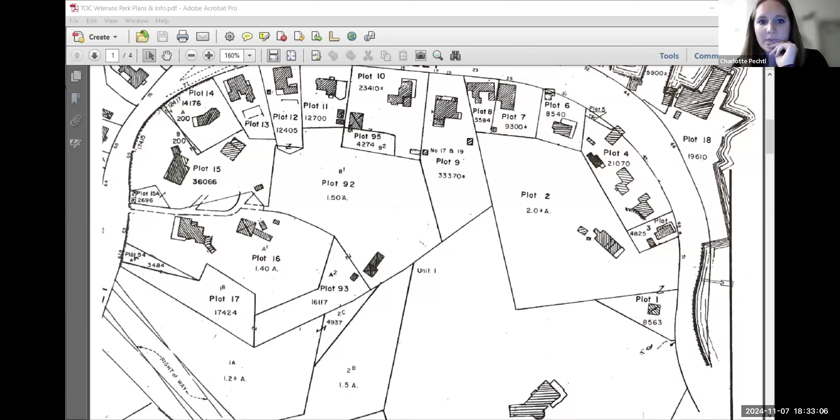Hold on one sec, I'm going to pull up the plans. You want to pull up the packet first, or the plan and the photograph probably is best. Okay, we'll do the plans first. This is just the plot of Veterans Park, right below the Elm Street condos. And then I have the proposed memorial wall up and the photos. Why don't you leave that photo up, I can talk better probably.

Good evening everyone. The Veterans Memorial Committee has been building out Veterans Park for 54 years. This wall we're proposing finishes off listing the only 2 wars we haven't listed yet, the Revolution and the War of 1812. Our proposal is we come along the top of that existing seawall, just build on top of that, no excavation, no disturbing it.

And just as you look up the walkway towards the condos, you see a little patch of grass, probably around 200 square feet. We propose to replace that grass plot with permeable bricks like they have on the walkway at the new condo walkway, so it blends better and pulls our park plus their open space together. So it's a very little additional hard surface. That'll come right over where you see that little piece of grass, and it'll blend the 2 properties together. And that's it, that's our intent.

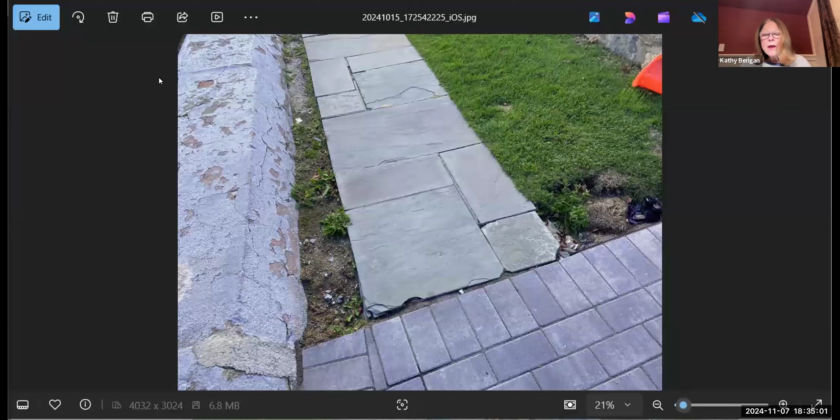Commissioners, let's start with you guys, do you have any questions or comments? I do. Glenn, where is the memorial actually going? You're building it on the seawall there? Right on top of the seawall, yes.

Okay, and it's a low 18-inch wall, like the round one that you see out there by the flagpole, probably about the same as the one behind the benches. I didn't measure it, but it's probably about 18 inches high. And it has, going back to the other picture, granite plaques where we list the names of the servicemen, and they're at a bevel at an angle like you see on the round one. Okay, great, thank you.

Anyone else? Steve, you're grumbling, are you going to talk? No, it looks pretty straightforward. I assume it's going to either replace or layer over the seawall itself.

It's built right on top of the seawall. We have some engineering drawings that the building inspector has looked at, so we know how it's going to fasten, and it's right on top.

Mr. Pratt, we haven't seen the layout of this, but is it going to be as wide as the existing walkway to the east? Well, the bluestone that's on there now will be replaced with the same brick, so we'll have the exact same surface. It'll just be the newer bricks plus the grass.

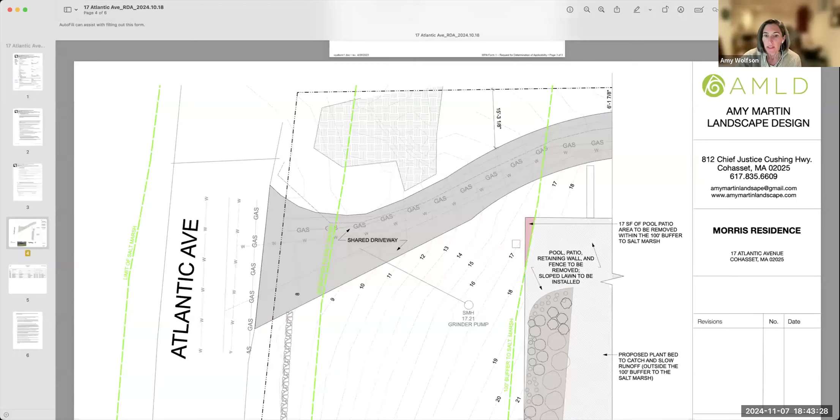17 Atlantic Avenue is across the street from a salt marsh. A portion of the property is within the 50-foot buffer and the 100-foot buffer to a salt marsh, which is over here on the left side of the screen. What we would like to do is remove the existing pool, retaining wall, and fence, which you can see in this picture. We're not going to put a new pool in. We'd like to remove the pool, the fence, and the vegetation growing on the pool and fence. 17 square feet of this area is within the 100-foot buffer to the salt marsh.

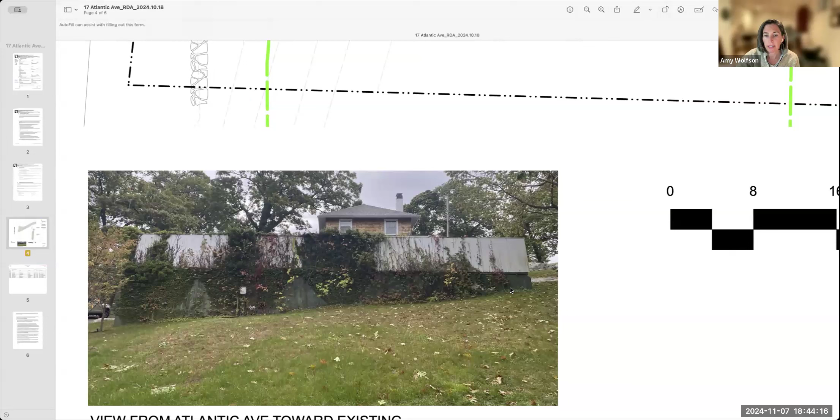What we'd like to do is remove all of this, and then this would become a sloping lawn. Outside of the 100-foot buffer, we are proposing a plant bed, which would help catch some of the runoff before it gets to the salt marsh, slow it down, and filter it before it goes down the slope across Atlantic Ave into the salt marsh. So this does seem like a net benefit to the site. We are removing impervious surface, but only a tiny bit of it is within the 100-foot buffer.

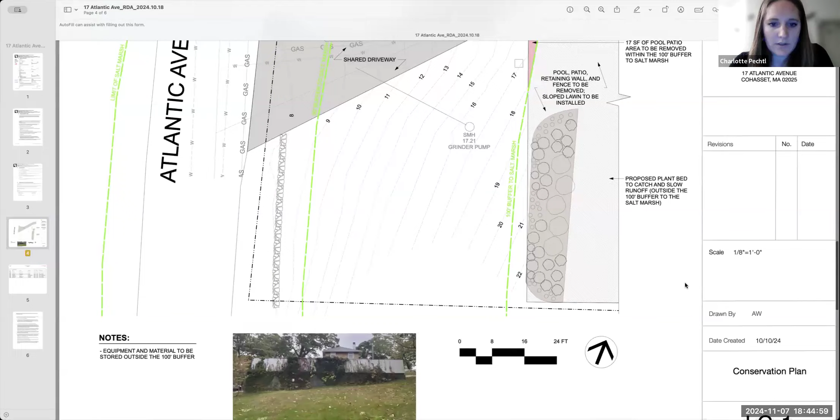Charlotte, you want to show a couple of pictures that you took on your site visit? Sure, can I take over, Amy? Go for it. Perfect.

I was waiting for them to load, so thank you. This is the existing pool in front of the home, and the majority of the pool, except for that bottom left corner, is just outside of the 100-foot buffer. It's atop an existing wall, and then the pool's in here. And then this is the sloped front yard, with the salt marsh across the street.

Okay, commissioners, you've seen it. Any comments or questions? Okay, last call.

I did have, Mr. Chair, some draft conditions for this one. I didn't know if any commissioners had questions, but I can pull them up if you like. Yes, please. Okay, just because this one involves removing a pool, I had some recommended conditions about pool water drainage. Give me one second, sorry.

There we go. So Amy, I can't remember if we talked about this, but obviously we don't want any pool water drained into the driveway, road, or catch basins in the street. Usually the standard is you drain it over existing landscaping, but since this is a sloped front yard, I don't know if the commission is open to having it drained in a way where maybe it doesn't just shoot down the hill, but can also be trickled down over existing landscaping. Either way, we do have best management practices for pools and spas, so I can include that as a condition and issue it with the determination.

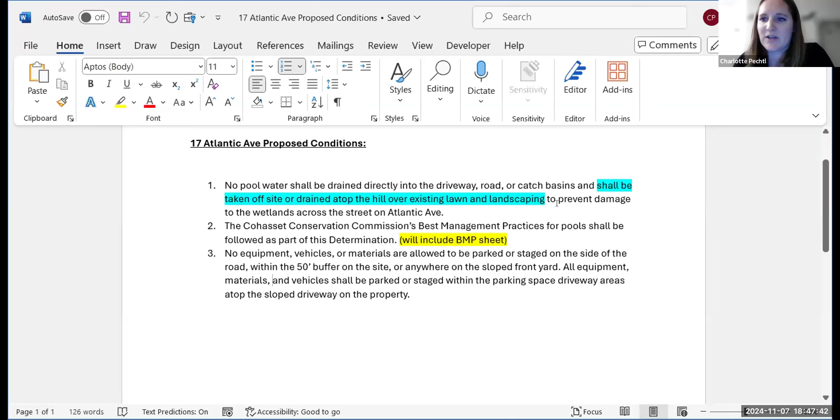We did talk about this a little bit on site, just about equipment, vehicles, and materials not being staged or parked within the 50-foot buffer or on the sloped yard, just to prevent any instances, and pretty much using the driveway parking area as much as possible, and not parking on the street or things like that. But yeah, I can take any of this language out. I just didn't know what you guys thought about the plan for draining the pool.

We actually didn't have a plan yet for draining the pool, so I'm glad you brought that up. But it does seem like a slow trickle that somehow has some kind of filtration would be helpful.

I think you're going to have to pump it uphill to achieve what you want, because we really don't want the water entering the 100-foot buffer. So you should be well above that. It is a steep slope, so if you can pump it to the top of the lot and trickle it in there, that'd be good. Otherwise, you can get a service to come pump it out into a truck and cart it off.

So one or the other. I would think it'd be best, if you're going to trickle it, that you actually take it to the highest elevation on the lot before you start pumping. Take your outlet pipe.

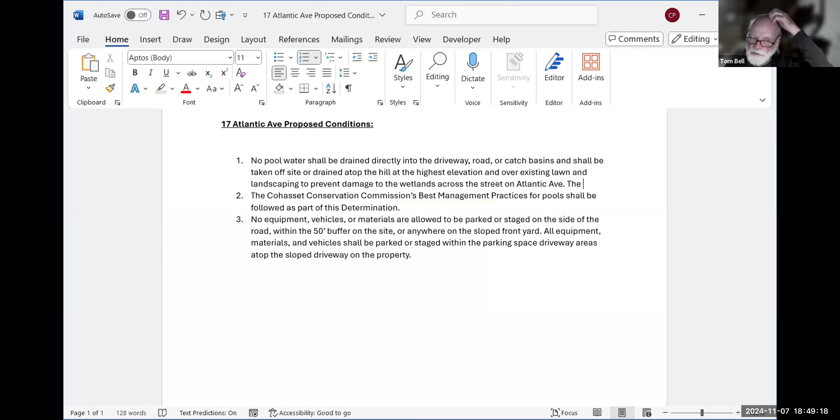I suppose we ought to think about a flow rate that is adequate for it to infiltrate, and it's hard to predict that in advance. So maybe we specify that the rate be slow enough so that there's little or no sheet flow, at least within say 10 or 20 feet of where you're discharging the water.

I didn't state that very clearly. Do you understand what I'm saying? Charlotte, how about you? Sorry, I was typing as you were saying, so the drainage rate shall not result in sheet flow within the discharge area. Does that kind of make sense? I would say you're going to have a certain amount of sheet flow in that discharge area.

The question is, how far down the hill will we allow that to be before it has to infiltrate? What we don't want is to discharge it at the top of the hill and have it end up in the street anyway. We really need to infiltrate all of that water.

Maybe before it enters the 50-foot buffer. Well, the 50-foot buffer is pretty much the street, isn't it? It's not quite - like a little bit, maybe not halfway, but a little bit less than halfway up that slope on the front yard. Because 100 feet is just at that bottom left corner of where that wall is. So the upper half of the slope is the 100-foot buffer, and the lower half to the toe of the slope and into the street is the 50-foot buffer.

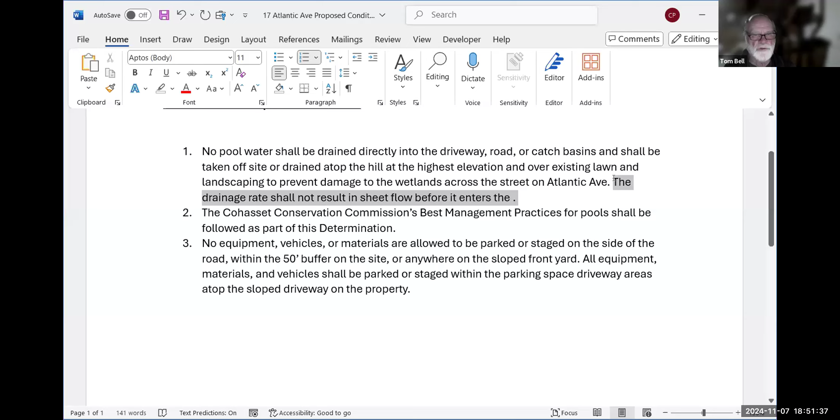So maybe we should specify that it be trucked out. It's hard to imagine somebody's going to stand there for 4 or 5 hours playing with the valves to make sure it's not flowing into the street. And if it does flow into that street, it would defeat the whole purpose of the condition in the first place. Yeah, that should be feasible.

Okay, is the pool still full or is it partially empty? I'm not sure how full it is. It's got a cover on it, so we can't tell.

I think I would prefer to see a condition that it be trucked away. If it wasn't such a steep slope and wasn't so close to the resource, it'd be one thing, but you've got a really steep hill. That ground's not going to want to accept that water - if it's like my yard, it's dry as a bone out there, so it would take a lot to even get infiltration started unless you dig a trench or something. So I don't see a practical way of discharging it on site. Now if you think there's an engineering solution for this, we could continue and you can come back with a different plan.

I think it's feasible to get it trucked off site. Don't we also have a restriction or prohibition on chlorinated water, which would probably make it more practical to truck it out? But it probably hasn't been chlorinated in quite a while - if they used it this summer, maybe, but if they haven't used it in a while, all that chlorine's probably evaporated.

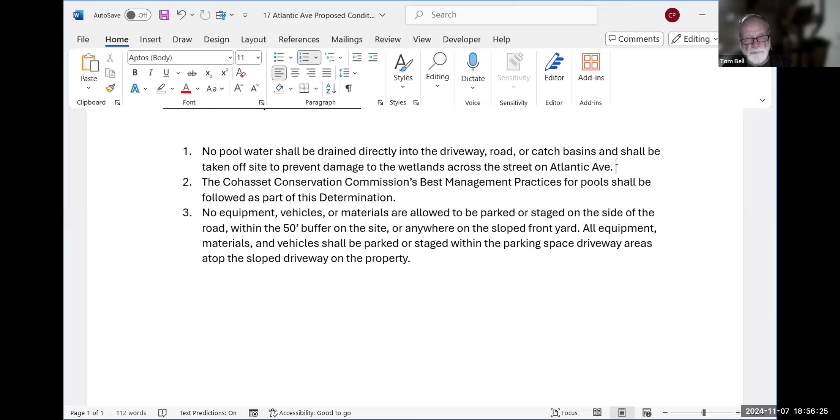Okay, so I move that we issue a -3 and -6 determination for the RDA 2418 at 17 Atlantic Avenue, with the conditions shown on screen, and the understanding that they can be modified administratively for the infiltration if it's feasible.

Do I have a second? Berrigan, second. Okay, Kathy, how do you vote? Kathy Berrigan, aye. Steve Magnell, aye. Valeria Romano. Valeria, you're muted. Unmute. Hello, can you hear me? Sorry, I was having trouble unmuting. Valeria Romano, aye. Tom Bell, aye.

That motion passes 4-0-0. Finally, we don't need a variance for this. This is in the 100, right? So we're good. So the public hearing for RDA 2418 at 17 Atlantic Avenue is now closed. Thank you, Amy.

Next is public hearing for NOI 2430, 16 Quonahassit Trail, for proposed additions. In accordance with Massachusetts General Laws, Chapter 131, Section 40, of the Cohasset Wetlands Bylaw and the Cohasset Stormwater Bylaw, the Cohasset Conservation Commission will hold a public hearing on Thursday, November 7th, 2024 at 6:30 p.m. via remote participation on a Zoom platform for NOI 2430, 16 Quonahassit Trail. Charlotte, will you introduce our applicant?

Yes, so I think, hi Xander, are you doing this? Are you presenting this one? Yeah, this one's me. We have the applicant, Matt Broderick, and Xander, could you introduce yourself for the record, please? Yes, so for the record, Xander Oram, Merrill Engineers and Land Surveyors, here representing the homeowner, Matt Broderick, for his proposed addition at 16 Quonahassit Trail.

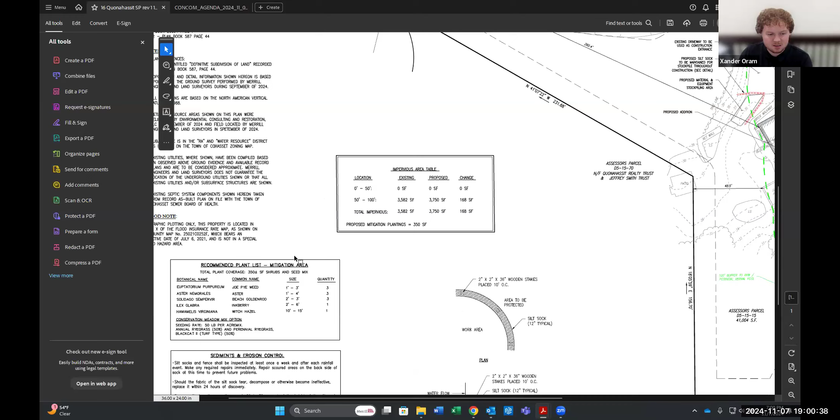We propose 2-to-1 mitigation since there are 2 resource areas here, so it's about 350 square feet of plantings. We have a planting list that's sourced—all the plants are sourced from the Cohasset Conservation Planting List. We can take a look at that if you all want to.

We have erosion control proposed around the addition, stockpile area, and around the plantings as recommended by the agent. We're requesting 2 variances, one for the plantings within the 50-foot buffer and one for theoretically being within 100 feet of a potential vernal pool. And that is it from me.

Charlotte, do you have any comments about this?

Unfortunately, I couldn't make it out to this site, but I had some recommended conditions for the project overall—mostly just looking at the mitigation planting area and figuring out the exact limits of that before any mitigation work starts. But for the most part, pretty straightforward for me. There is still a variance request that was put in place as part of the plantings that are partially in the 50s, so the applicant has submitted that for your approval.

I don't think there are any bedrooms being proposed, so you don't need any other board reviews for this? No, I don't believe so. Okay.

Yeah, I have a couple of concerns. You just told us that the potential vernal pool is coincident, the edge of it is coincident with the wetlands edge. Is that right? That's how we are describing it, yes, just being conservative. So that means you've got a 100-foot area around your vernal pool that's a no-disturb zone, according to the Cohasset wetland regulations, section 26D I believe. Correct me if I'm wrong. It says that structures within 100 feet of a vernal pool which pre-exist identification or certification may be maintained but not expanded closer to the vernal pool.

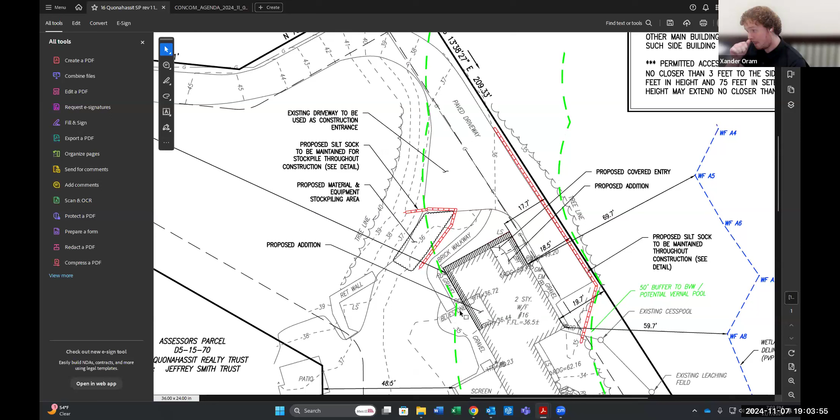My other concern is I see you've got a cesspool and an existing leaching field. Has that been tested to see if it's Title V compliant? I'm not sure the answer to that. Obviously, if you've got to put in a new sewer system here, that's going to be an issue too. Well, as far as I know, it's working. The applicant, the homeowner, currently lives there and is occupying the home. So I don't believe it's been tested, but it's functioning—he's living in the home.

Well, I'm just noting these things because this property is adjacent to two significant resources, very close to it. It's been there a long time. I understand that. And having a cesspool there still is obviously a threat to the resource. If it hasn't failed, then there's really nothing we can do about this. But I'm not sure of the protocol here.

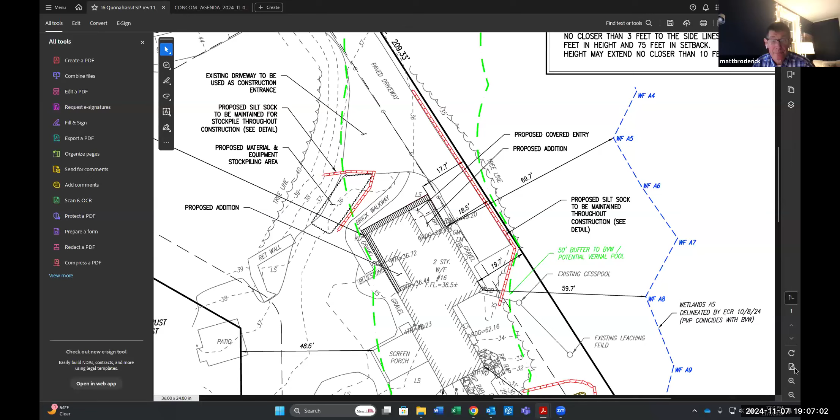Just lawn, landscape area. The area right there, Xander - oh, there's actually a bulkhead now. At this point we've got it listed as permeable, but frankly that's a big chunk of granite currently. So the only thing we're doing there is putting an access porch where that bulkhead is, leading out, and it essentially covers that same area the bulkhead is in now.

And then the other side is that rectangle to the west - that's currently gravel, just a walkway to a door. Between the existing kitchen there's a porch on the southern side, and that's basically getting turned into a rectangle from these open areas. The house itself, originally from around 1860, had its front door pointing south, which is now the railroad, so we don't have an entrance besides the one on the western side, which is just a kitchen door.

So that's the plan. I was actually asking about the area that you're going to do the plantings in, or what was in there now.

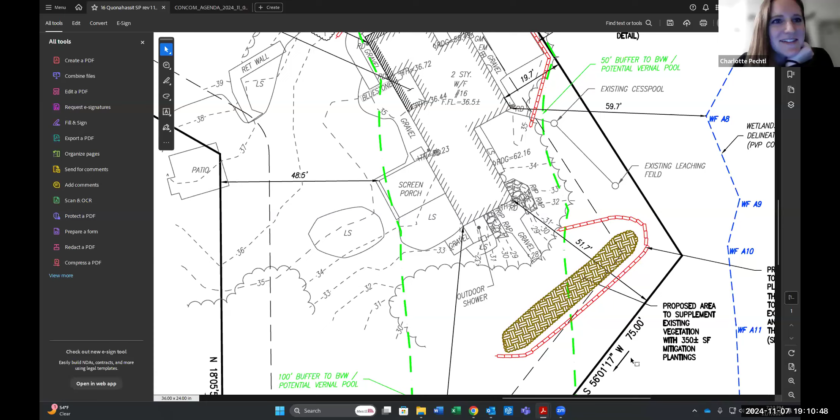Xander, can I take over here? Oh yes, 100%, there you go. Yeah, the Zoom updated, so it's like, do you want multiple people to share? I'm like, no. Yeah, it looks different now. I hate that, that's why I got confused earlier sharing the screen.

So I can take this condition out, seeing as there's no bedroom count, because that was Board of Health's concern. They just didn't know if the addition would result in an additional bedroom that may impact the working cesspool system. So I can take this out unless you want to leave it in as just a safety thing.

Is it okay, Mr. Chair, if I ask the applicant directly - do you plan to put in any bedroom space? It's really just a bump out of an existing room? Mr. Broderick, you're muted. There you go, I got it. Thank you - no, we don't plan on adding any extra bedroom space.

Okay, awesome. Yeah, just because that may or may not impact the permit, may impact the plans, and then it may or may not have to come back to us.

So that's good, so yeah, just three simple conditions then. Just so you know, I apologize, Mr. Broderick, I wasn't able to get out today. I really wanted to, but unfortunately I was held hostage in the office today.

So the exact location of the restoration area shall be located in the field by the applicant and reviewed and approved by the agent prior to planting.

Just so you know, maybe we want to shift it. We'll just make sure that it looks good before any planting work starts. And then the final list of proposed plantings shall be submitted to the agent in writing for approval prior to any planting work, just because sometimes what's on the plan, maybe we want to change it.

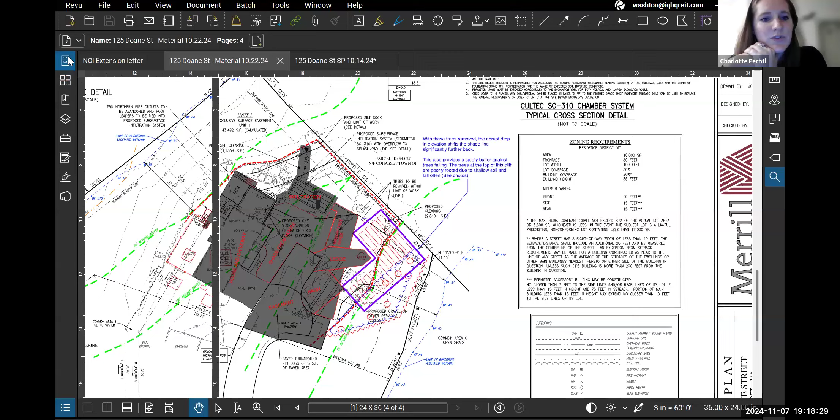Yeah, a couple things. Will, I see you've pulled up the material - I don't know if that might be helpful for your diagram that shows there seems to be limited space on the property to put this. I think you said there's a specific reason why you chose this area for the lighting. On this side, where the proposed garden bed and everything is, I can pull up photos too if helpful, but there's a pretty steep slope that drops down to where the wetland is.

Over the years, I've seen a lot of trees fall down in those areas. So the trees are sitting on very little soil, whereas the trees on the other side behind the home have more space, more soil, and seem healthier and more stable overall. Some of the trees that have to come out for this proposed project aren't on the slope, but they are in the area where a lot of trees are falling down.

Will knows our rules about if the commission wants to see replacement for that. I did propose an operation and maintenance plan for this project. There's an administrative stormwater permit that's also inclusive for the project. But I did ask Merrill and Will to draft out a construction and long-term maintenance plan. I don't think the details are in there yet, but I wanted the details for how the greenhouse and the garden area will all be maintained, so we can work together on that.

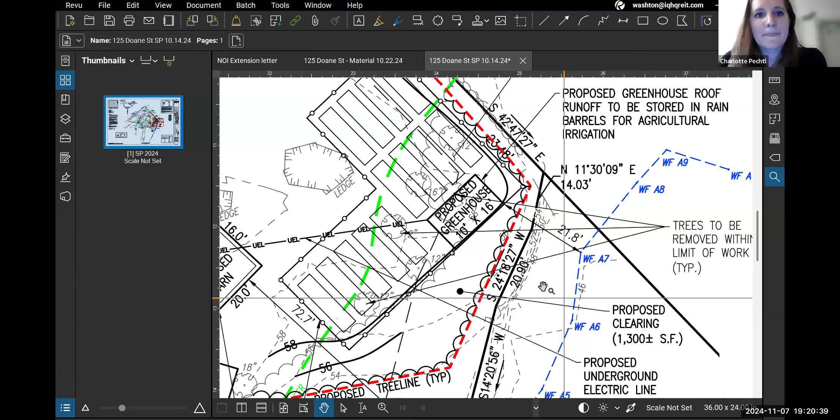Just to point out on the plan what Charlotte was talking about - you can see here all these elevation lines very close to each other is where that drop off is in the back. From there to the left on the plans is where these trees fall down all the time, because presumably they're probably all on some sort of ledge, I would think, but I don't know.

What are the species of the trees? Well, I think there's 7 that we show here to come down, and I think 4 of them are some sort of pine. There's only one large deciduous tree - I don't know if it's a beech or not. There's a lot of beech back here that are all struggling anyway. And I think one is an oak tree. Yeah, there's at least one oak. I can't remember if it's the 16-inch tree, but yeah, it's a handful of pines, one oak, and I believe one of the smaller species might be the beech.

So are you going to have to bring soil in for these, I'm assuming these are raised beds of some sort, right? Yes. So the base soil to make a level place to set them would not be imported, but the planting soil would be, yes.

And so what do you propose to bring in there? I'd assume loam, right? Yes, Victoria, my wife, has already started this year in planters with this, and she got the soil from - I'm sorry, I don't remember - it's Wild Maine something or other that's OMRI certified organic, Coast of Maine stuff. Yeah, there's a handful of varieties that use crustacean shells and seaweed. Yeah, some of the topsoil sources are kind of questionable, where that soil comes from and what might be in it. That's good that you've got something that's certified.

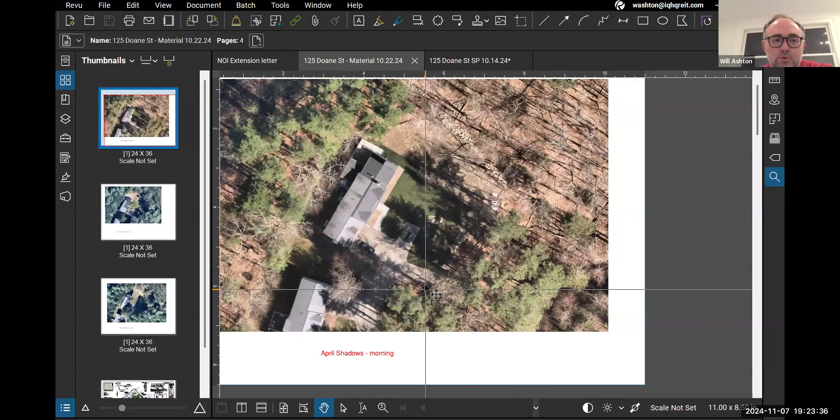So I did a Nearmap study of our yard because Victoria wanted to know where it would grow best. She has both semi shade-tolerant things and other things that require a lot of sun. So on our plan, we have the more shade-tolerant stuff in this side yard outside the buffer, but where we need more sun, I put this together to show where all the shade is, and consolidated this into a plan.

We have our infiltration here, so we can't do it there. This is shaded from the house. This is an easement we can't build on. This is shade from trees, and this is ledge. So that left us with this L shape down in the corner. This ledge back here, an 8 to 10-foot drop - if you cut the trees back, the trees behind it are that much lower, so you don't have that much shade back there.

So I noticed in your application that you brought up the term limited project. Does this fall under that rubric according to the state? Yes, because it is agricultural.

Even though there's no exemption because of prior use - so at least what little I know of the limited project statute is that it's usually brought up with regard to access to a piece of property that might cross a wetland. But in this case, you can claim a limited project for an agricultural project. Correct, yeah. So that makes you square with all of the local rules and regulations here stated.

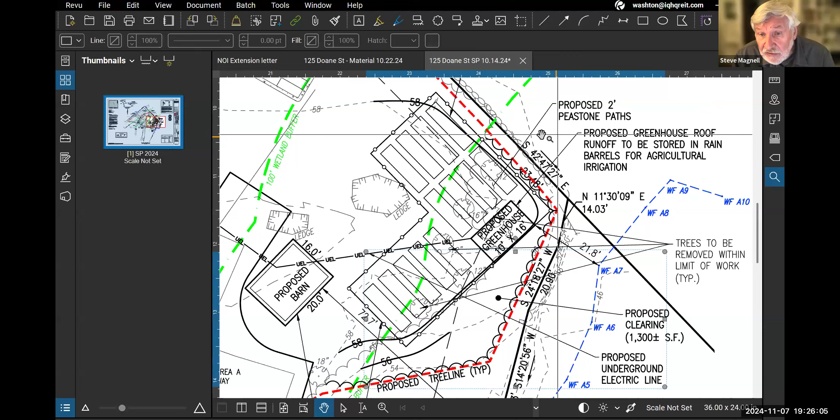One is, you show in one of your drawings a greenhouse within the planting beds. So that greenhouse is a building which will be inside of the buffer zone? That's right. It's not a traditional building like the barn or the house with a foundation - this would be set on top of the ground. There won't be any foundation in the ground. It'll only be 6 or 8 feet tall, and it's just to grow plants in the winter.

And how do the beds drain? Through the bottom, through the soil. This whole area will be soil, and the beds will be right on top of the ground, with stone paths in between. So the entire area will be permeable straight into the groundwater.

How are you going to keep the deer out? A 6 foot tall deer fence. And so that's what we're looking at there with the circles. Electric? No, I don't think we'll need to. They come walking through and eating my grass now, which if they eat the grass and not the flowers will be good.

Yeah, I wouldn't count on that. They'll go for the flowers first. Right.

The nutrients for the flowers aren't going to offend the buffer zone with drainage, right? Was that already discussed? Great question - we're going to have all OMRI certified organic fertilizers, if any at all. Victoria did some in pots this year and didn't need any specific fertilizer. Everything grew pretty well just in the soil that she had, so I don't even know that we'll need anything extra.

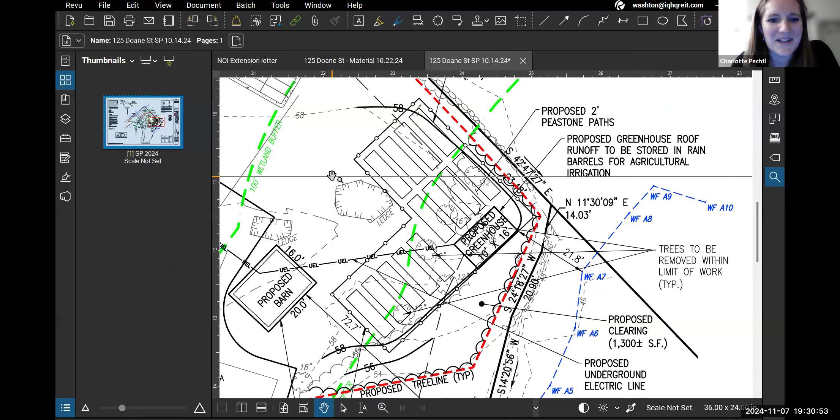So Charlotte, you have some conditions prepared? Mine were pretty simple, actually. I probably should have looked more at the limited project stuff, but I just mostly wanted to recommend... Will, is it okay if I share my screen? Yeah, yeah.

Where is it? You beat me to it. I mean, I will defer to the commission on this, but these are things we already talked about. So I think it was 6 or 7 trees coming out in the buffer zone. I think 7, let me count them. 7, yeah, that's what I remember, but I could be wrong. Oh no, 6. 6 in the 50, 1 in the 100, got it.

Okay, yep, that's where it is. So it's up to the commission if you want any tree replacement. And then, as I already mentioned, finalizing that long-term operation and maintenance plan to include maintenance details for the greenhouse and the garden bed, just to make sure we understand what's going on. And then with a long-term maintenance plan, you would just record that and use it moving forward, and you'd be falling under the different standards under the Wetlands Protection Act for that specific area, I believe.

So do you have a tree replacement plan? We don't think there's anywhere feasible on site to do it, both because the only reason we're taking them down is because of the shade, and everywhere else is taken up by infiltration or easements or whatever. Also, I think the benefit of converting lawn back to planted area, which will bring pollinators and filter rainwater and all this other stuff, could offset the 7 trees that are lost.

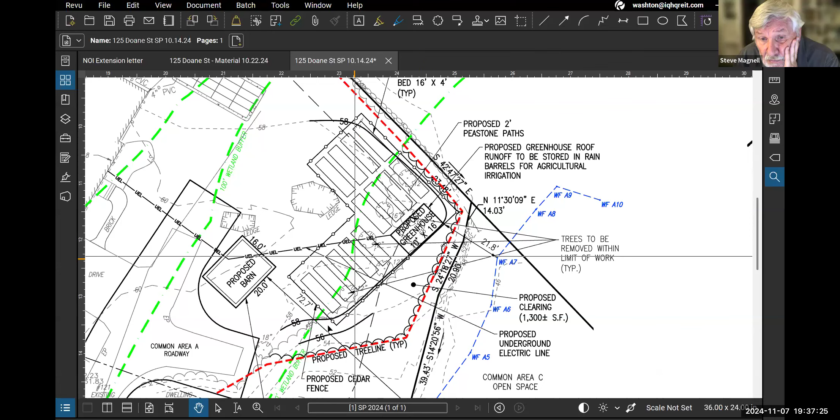So Steve's question first, since you asked first. Clearing area - you have a proposed clearing of 1,300 square feet behind the beds. That points to this whole area from the silt sock in red to the current tree line, out here in green. In the area it specifically points to, there are no trees over 12 inches, though a couple have fallen back there. There are some vines and things like that back there. And Tom, your question was?

I just wondered, you said that's a common roadway. Yeah. So there's an easement there that presumably belongs to everybody on the road, right? Yeah. Is there an opportunity to plant trees along its edge someplace between there and the south end of it? I don't know if I have it in this aerial, but it's already fairly treed. I don't know if you can, or I can pull it up on Google Maps - there are trees down that entire side. Yeah, because that's where our current drainage for the driveway goes into kind of a gully that's all treed.

I can show you on Google Maps if you want to see.

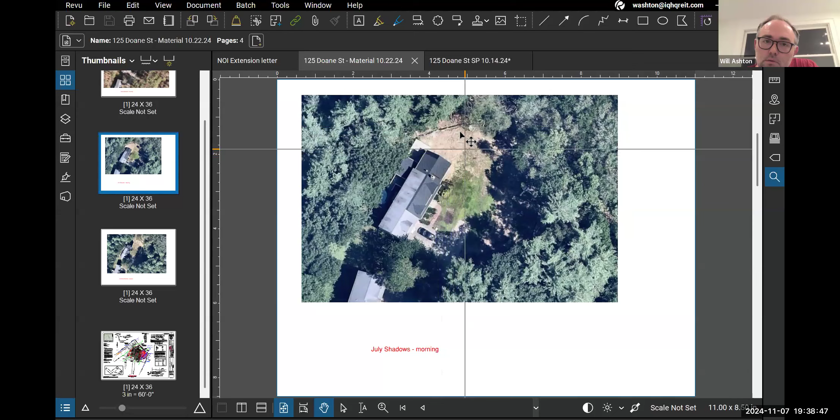What's that brown patch area, I presume that's a silt sock along the edge? Is there any room up there where you can sneak in a few trees? On the north side of your silt fence, I presume this is oriented north-south? That's the one we were required to plant from last time, it has to go right there, but we haven't planted it yet. So there's no room for a couple more there, huh? Right.

Or, like Charlotte was saying, if we wanted some sort of smaller plants there, they might fill in better than a lot of trees, you know what I mean? And that would be a good location because I don't think there's a lot of ledge under there. I think it's probably well watered and gets a little bit of sunlight, so it could work if that's of interest. It looks like it gets a fair amount of sunlight, at least for half the day.

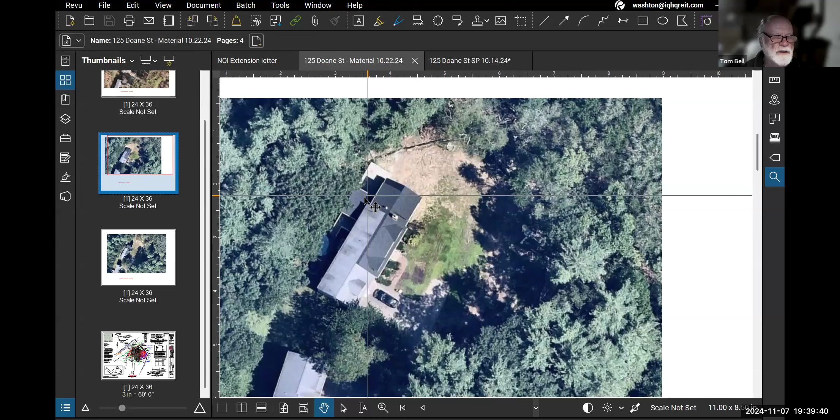Can I ask a little more about this fund? How much would that be, and is that really something that's used by us? In the time I've been here we haven't really done a lot with this fund idea. I'm gonna be honest, Valerio, this is definitely new for the town, so I don't know.

I don't really know the schedule, and also DPW has a street tree policy - they choose from a different selection of trees than ours. If he were to donate to the tree fund instead, that money would be used by the town to plant trees, but they'd probably go by the street tree policy, which is a different selection from our list, coming from a more conservative background with smaller ornamental trees. So I don't know how or when it would be used - I'd have to double check, and our DPW staff are already pretty busy.

Will, you were on the commission for quite a while - what if we let this hang out there as a condition that you and Charlotte would resolve administratively? You know what we want, right? I think Tom's right. You've been on the board longer than I have, and in my time as chair and before, I've never seen a case where we didn't replace trees within the 50. I get that you're improving the property, but we've got to do something with that, and I think Tom made that pretty clear too. So I'd let the rest of the board chime in, but do you think that would be a resolution to keep this project moving, or do we want to ask Will to come back with a planting plan, even though it doesn't seem like he has any place on this property?

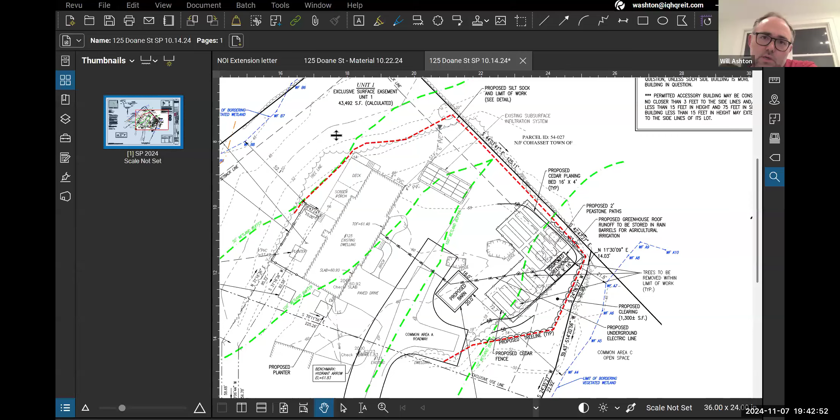Are you guys still seeing my PDF or Google Maps? Okay, we're seeing yours, looking at the plan.

Let me share this just as a thought really quickly. Sorry to delay everybody else behind me - I know how that goes.

You see Google Maps now? Okay, so here's an interesting thought I hadn't thought of before. Our property actually goes back here to the entrance. The entrance to the parking area for Wompatuck is an easement to the town on our property, so we could plant stuff back there theoretically, outside the easement but on our property.

And it is within a buffer zone? I bet it is. This floods right here all the time, the water is always at the street level right inside the entrance, so it has to be, I would think.

So that looks like a viable solution to this. Maybe you and Charlotte can go out there and have a look and see how many you can squeeze in there, and pick appropriate species that are going to work there.

That would satisfy me, and it would resolve our apparent inconsistency if we don't do this. Every project is different, I just want to say that, but I'm fully agreeing with you that we'll go plant stuff back there for sure. Hate to be put in a position where, I know.

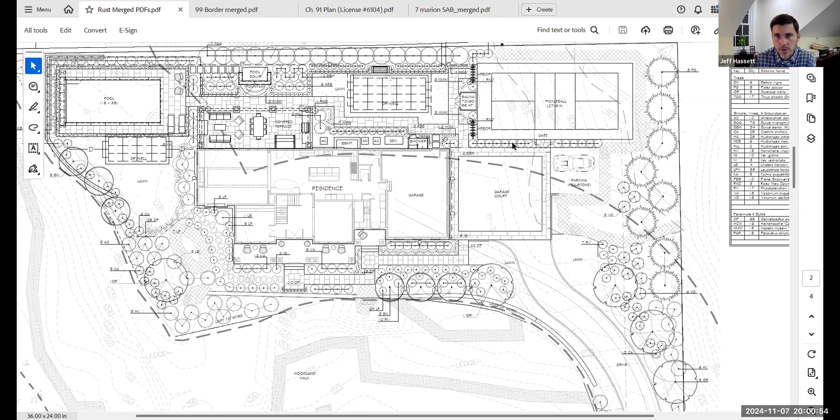Okay, so my next comment is that's not just lowering the ground a little bit. We're going from 67 down to 59 feet. They're gonna move a lot of rock here. A portion of it has already been removed. The previously plan had a driveway turnaround that went into this area, so maybe a third of it's already been removed. But yeah, there will be more.

And the hatched area around the side had contours on it before, so what's going on there? Scoot up to the drawing. I'll go to the site plan with the contours. Yeah, so it looks like some new contours around the pickleball court here. Oh, I see. That's steep grading showing the ledge cut. I was looking at that upside down, sort of, in my head, thinking how does that work. But I hadn't noticed the contour labels. Yeah, okay, I get it.

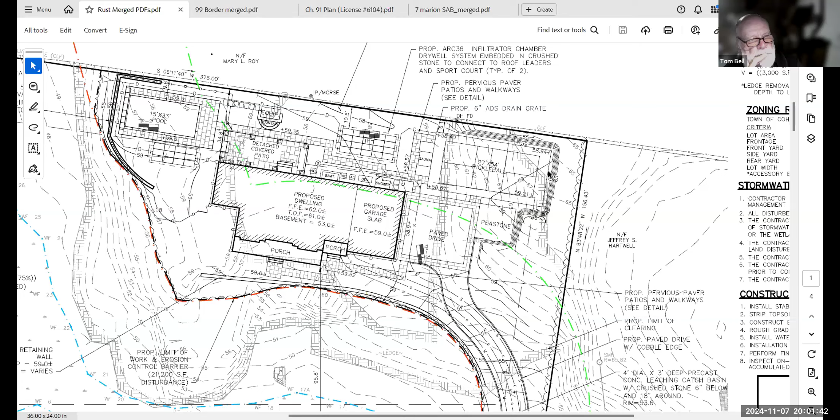Oh, beyond, Charlotte, to address your first comment about the erosion at the end of the wall, this driveway is now going to have a cobble curb on the side of it. So essentially that's going to intercept any runoff coming in this direction. So you're only going to have the runoff from this small area between the house, the driveway, and the wall. So I think once that driveway is established, there's going to be almost no watershed to that area causing the erosion.

Okay, so that area you see just above the catch basin, we were looking at it from there, and I don't know if the final grading was put in, but you can definitely see a low point there. So I'm just kind of concerned about that area where the retaining wall ends. I didn't know, based off the final design, if you would still see that, but from the existing grading towards the abutting property, it looks like it would already be pointing in that direction.

But what I was saying is right now you have all the runoff coming to that point, and there's a lot more runoff coming there now than after the driveway's put in, because the curbing intercepts the runoff and puts it into the leaching catch basin. So I think we'll be able to get that stabilized. If we have to, we'll put some stone down in that corner. I don't think it'll be an issue though, honestly. The catch basin hasn't gone in yet, the driveway hasn't gone in yet. It's just what we were looking at on the site mid-construction, so it did look like a vulnerable point with runoff. We could get some riprap in there now too, in the short term.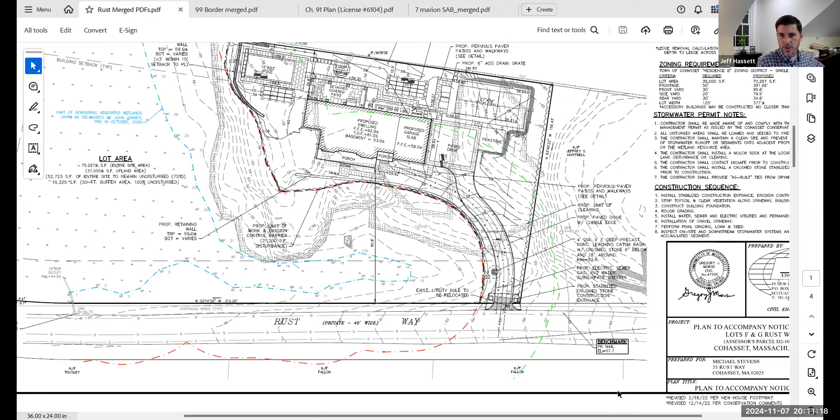So it does say proposed stabilized crushed stone construction entrance there, but it certainly doesn't show a 30-foot long zone of crushed stone. No, I'm just generally pointing to that area. So you are going to put something considerably larger than that striped area that's shown, okay.

Yeah, Rob, can you make sure of that? Yes, definitely. Rob and I talked about that on site—before they start a lot of this work, we should re-establish the stabilized construction entrance and take a look at the erosion controls around the site, since it's obviously been a while since the original ones were put in. So we definitely wanted to walk the site.

I think maybe expectedly more in the spring, right? And then just make sure that's all in place before they start taking care of the hardscaping and landscaping. Absolutely. Charlotte, do you know whether John has examined Rust Way for the condition of the pavement—

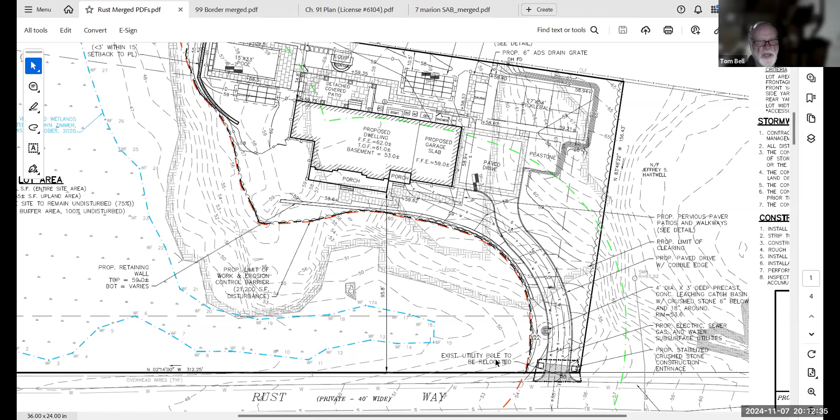I know in the past he's seen projects here where you move a lot of heavy equipment on it and required that the applicant repair the road. I can think of one specific example, but do you know whether he's looked at this? I do not, but if that's feasible for the project, I'm happy to put that in as a condition to just work with the building inspector and ensure if there are any road repairs that are needed, they're taken care of while the permit's active, I guess. Yeah, please. Would that be, Jeff, does that sound acceptable?

Rob? Yeah, okay, I can type that right now. I'll try my best to do that right now.

We'd be using Johnson Brothers if we go the blasting route, and I think they're very well known in town, very reputable. Yeah, those are the guys that tore up our street.

Was it them or the company that moved their equipment? Well, actually, it was the company that moved the equipment in and out. But I know from firsthand experience that our private ways, of course, doesn't cost the town anything, but it certainly wreaks havoc on our private ways. And so

I think we need greater protection for those, at least. I agree. Yeah, I live on a private way also in Cohasset, so I understand. I actually live right around the corner from the project on Stoneley Lane. Yeah, you wouldn't want to see Stoneley Lane with new ruts and potholes and cracks. Oh, we already have that. I wish that had been looked after on Howe Road. It perfectly ruined half of it.

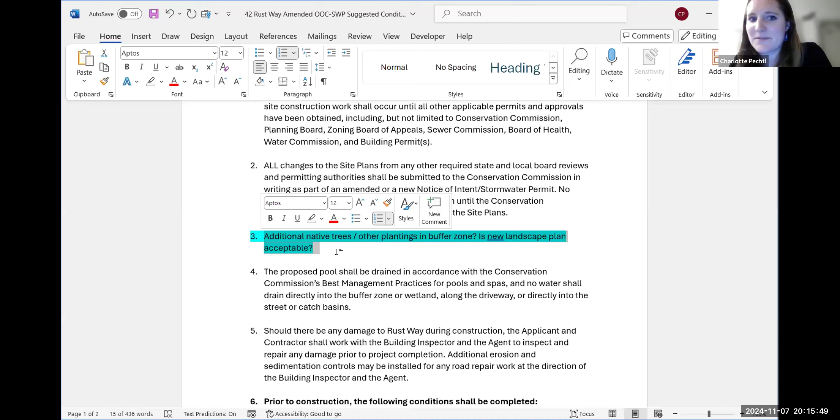And then the proposed pool shall be drained in accordance with the best management practices from the Conservation Commission for pools and spas. No water shall be drained directly into the buffer zone or wetland along the driveway or directly into the street or catch basins.

And then should there be any damage to Rust Way during construction, the applicant and contractor shall work with the building inspector and agent to inspect and repair any damage prior to project completion. Additional erosion and sedimentation controls may be installed for any road repair work at the direction of the building inspector and agent. I'm mostly probably, I assume, building inspector, but obviously since it's right in front of a wetland, I just want to make sure if they are working in the road, I'd want to see a barrier up there in front of the wetland.

And then prior to construction, the following conditions shall be completed. Well, we don't need, I mean, what do you guys think? It doesn't sound like, I mean, Jeff's pretty confident that it doesn't sound like we need anything below the retaining wall. But I don't know if we want to just keep it in here as a template, just with the note that obviously we don't want encroachment in the 50-foot buffer if we can help it, because that was the original intent of this project.

How many more feet of wall are we talking about here? Ten? Oh, you mean from the edge of the wall down to the end of the driveway? Yeah, not to the end of the driveway, but just to ensure that the wall extends at least a bit closer to that drain. Well, I don't know if we'd want to extend the wall unless you guys want to see that, but we were thinking more of like stone riprap if we had to stabilize that curve, but we may or may not need it.

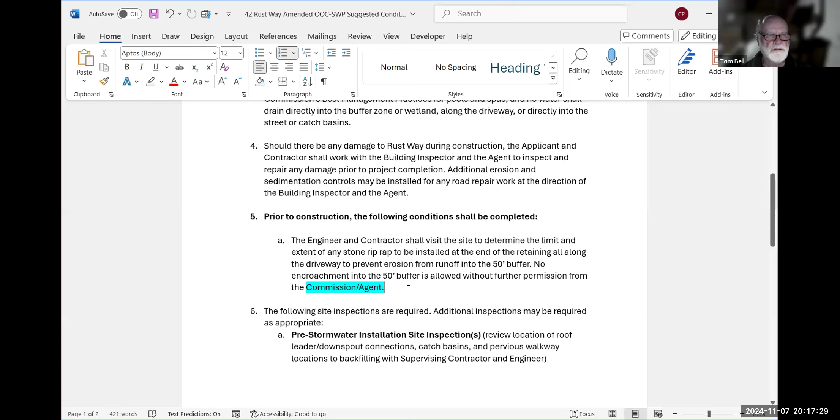And then site inspections, pretty standard. I didn't include pre-construction, obviously, since the project's already ongoing, but I did stormwater, pre and post grading, landscaping, and final site inspection. These are very standard conditions that we put in now, just so that everyone's aware. There's a lot of hands that change over when you get to the hardscaping and landscaping side of things, so just want to make sure that we're checking the site out, looking at erosion controls. So, yeah.

Okay, last chance, commissioners, to add any conditions or modify the ones we have on screen.

Okay, let's see, where are we here? I've lost my way on my... Rust. Here we go. All right, just need to get to the top of my script.

So I move to issue an amended order of conditions for NOI 2114 for 42 Rust Way for construction of a sports court, pool, driveway, and wall changes, and let's throw the stormwater permit in there as well. The amended stormwater permit 21-15 for 42 Rust Way, with the conditions shown on screen and entered into our meeting minutes.

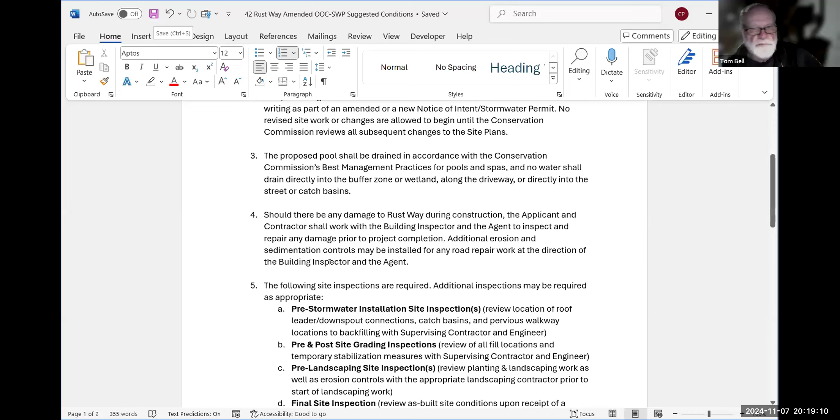Do I have a second? Berrigan, second. Kathy Berrigan, aye. Steve Magnell, aye. Valerio Romano, aye. Tom Bell, aye. That motion passes 4-0-0.

There's going to be work out. There's no work in the 50, right? No. So no variance needed.

Okay, it looks like we're wrapping up then. So the public hearing for NOI 2114 and stormwater permit 2115 at 42 Rust Way is now closed.

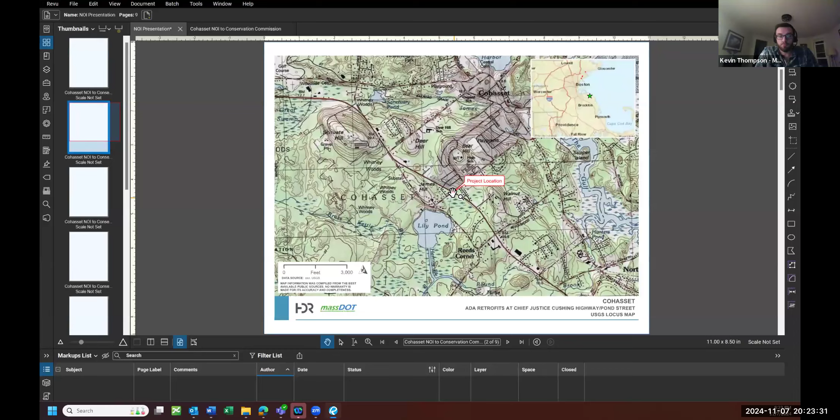The purpose of the project is to facilitate improvements of street-to-sidewalk access ramps, necessary to serve individuals with disabilities and to enhance safety. With that, I'll turn it over to Mike to present the full project for us. Thank you. Mr. Turgeon, you're muted.

There we go. So the project is at the intersection of Pond Street and 3A. We're pretty close to the schools over here and Lily Pond over here. Lily Pond is a public surface water supply. There is an intermittent stream that runs north of the project along 3A through under the intersection and then into Lily Pond. So the wetlands in the vicinity are outstanding resource waters. There are two other smaller intermittent streams that aren't shown, but we'll talk about those when we get to the plans.

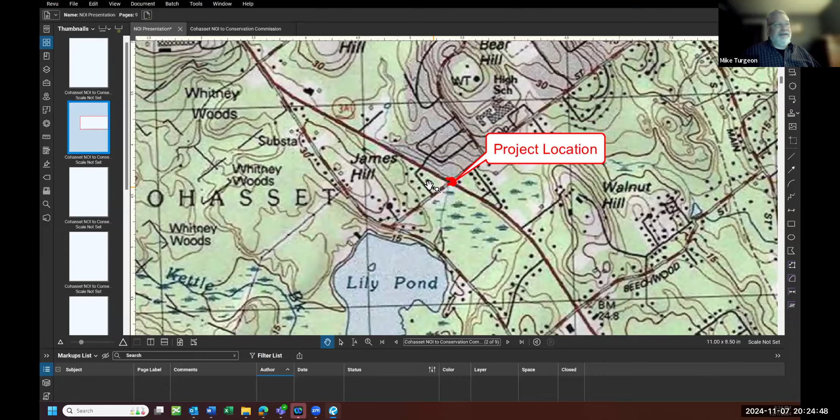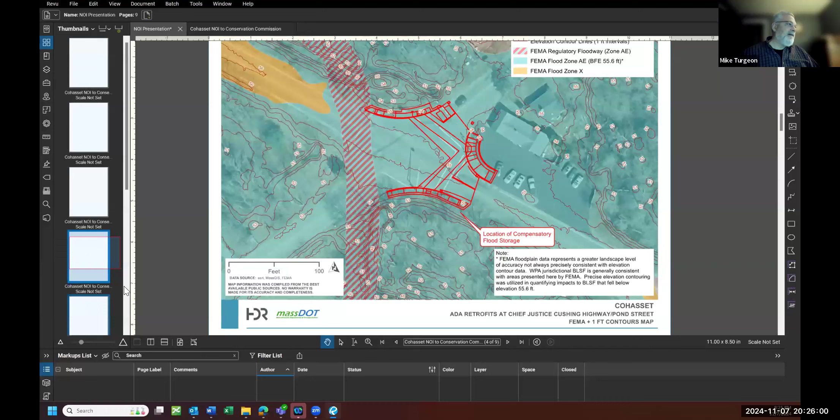And this is the southern corner of the intersection. There's an existing paved sidewalk here with no ADA ramps here or here. This is the eastern corner, eastern quadrant of the intersection, where you have no wetlands in the immediate vicinity, but there's kind of an island here with no ADA ramps associated with it. So it really makes it very difficult for someone trying to get around the corner.

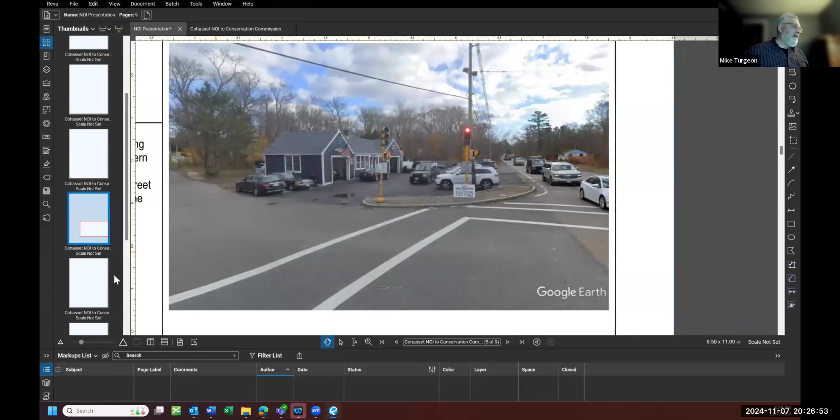And this is the northern quadrant. This area is not paved currently, but it has been altered significantly enough to not provide BLSF habitat. And it's on the northern quadrant.

So here's our impact plan. This is the stream flows along 3A. And there's a culvert here. There's a 12-inch RCP here that picks up water from the road, and there's a channel here that connects. There's a confluence here of these two streams, and they're piped under the road to the southern quadrant over here, and it heads off to the south.

There's another stream across Pond Street. There's no work going on in this quadrant, but there is a culvert here with an intermittent stream that drains to wetlands down here.

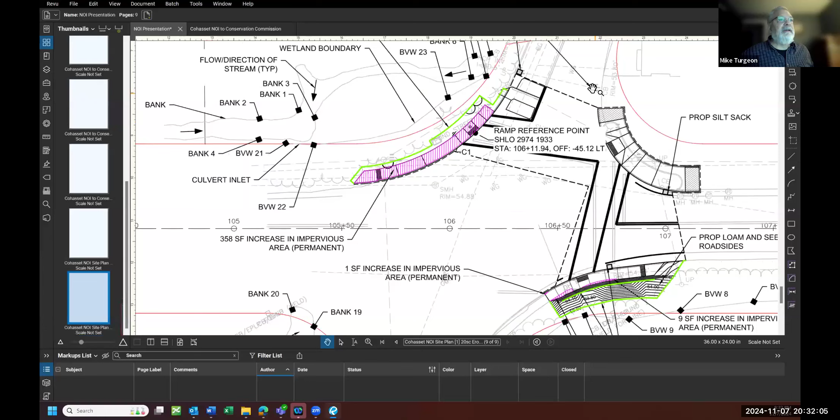And so I'll go to the next page. And here we're showing the compost tubes are in green. For erosion control, they're shown here as well. We have silt sacks proposed at all catch basins. Here, here, here, here.

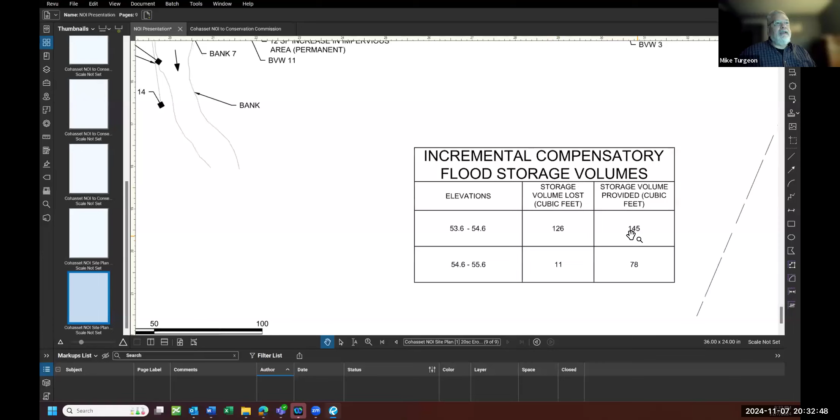And here's the proposed compensatory storage area. These are 1/10 foot contours. And so for the elevations between 53.6 and 54.6, we have 126 cubic feet lost for the construction of the sidewalks, and 145 cubic feet provided for between those elevations in the compensatory storage area. And then for between 54.6 and 55.6, we have 11 lost and 78 provided. So you end up with an increase in flood storage.

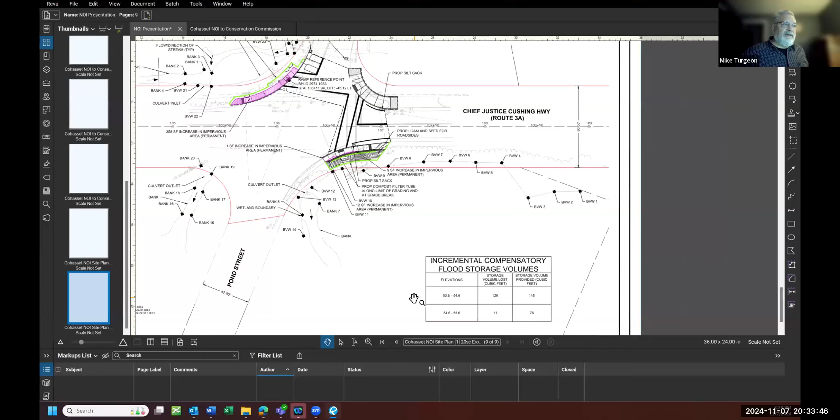And then so the only impacts to floodplain where there is currently habitat, it's for the construction of the compensatory storage area. They're below the 5,000 square foot threshold for impacts to floodplain habitat, and they provide more storage than required in the performance standards. And though we meet all the performance standards, we are also falling under a limited project at 10.53(3)(f), roadway maintenance and improvements for less than half a lane.

That's it for the presentation. Do you have any questions?

Charlotte, do you have any comments?

So, this falls under a limited project under the Wetlands Protection Act, but also in general, the MassDOT projects are exempt from our local bylaws. So we're just dealing with the Wetlands Protection Act for bordering land subject to flooding, wetland buffer zones, and limited project standards. I previously clarified with Matt, Mike, and Kevin that they're not upgrading any of the existing stormwater management systems here, the catch basins and everything, because it was determined that the existing systems can handle the increase in impervious surface, even though there is a slight increase in the 2-year and 100-year storm event runoff rates, the existing systems can handle it.

I did propose a draft set of conditions that are very similar to the conditions you've already seen for the other two MassDOT projects. Sorry, I know I sent that to you guys last minute. I don't know if you had time to look through them, but a lot of them are pretty straightforward. So at any point tonight I can review those. But those are really my comments that I had already clarified with their team.

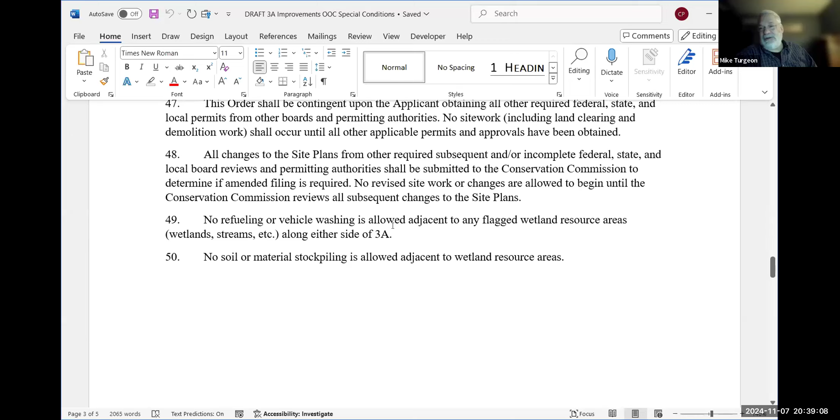I think we had some concerns about the condition where you ask us to restrict work to low flow periods, and we're not really doing that. So if we could amend things to be more applicable, maybe a stream crossing or work actually in the wetland, that would help. Agreed, yeah, I think it was number 39. 39, okay, so I can take that. It was referenced in a couple places, but I think generally, if you can.

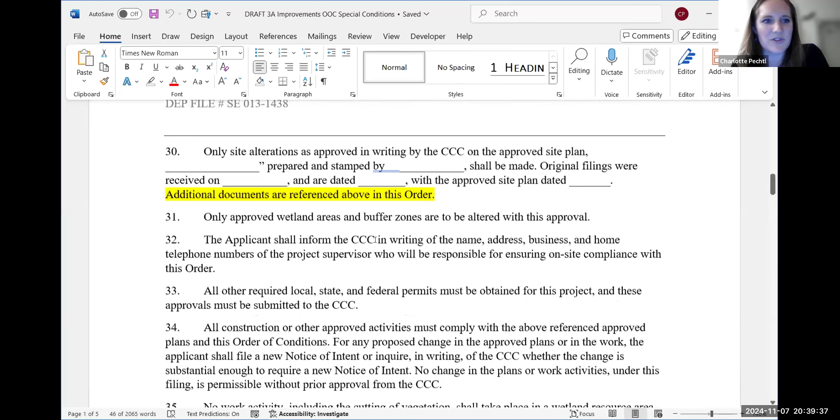So, yeah, just to quickly reference for the commissioners, this may look familiar to you. This is our template. We had previously revised it to remove... We can't see it, Charlotte.

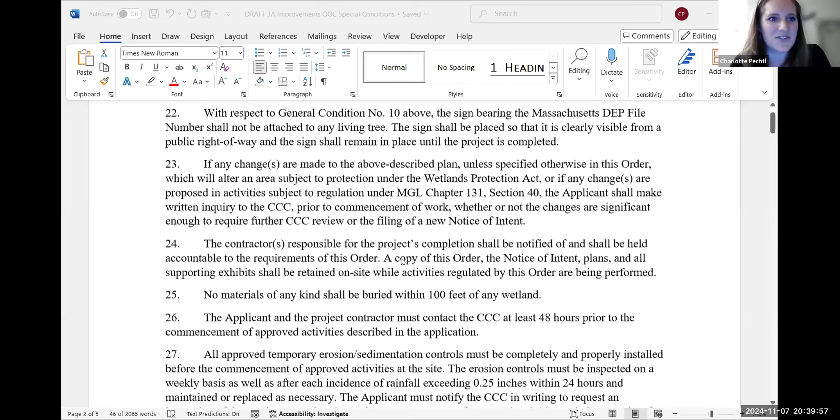So as commissioners, you guys know this is our template. We had previously modified it with the first MassDOT project we looked at to remove references to the bylaw, so this is pretty much copied from that. Condition 39 is a standard condition in our template. Since it's not pertinent to this project, they're not working in any wetland resource areas, do you guys think it's okay to take this out? Yeah, let's remove that. Okay, I'll change the numbering then, so you can ignore the numbering for now.

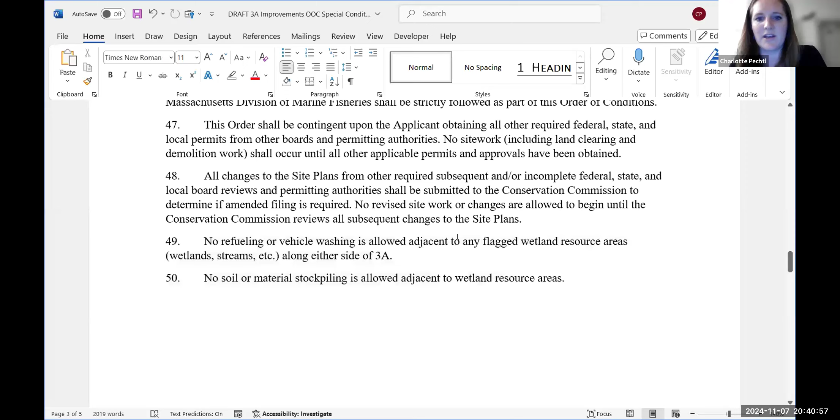So these are all our template question language. We don't read these for orders of conditions because we usually have this inclusive with our proposed conditions. So I'm going to start at 47 onward. You guys have seen these before, that the permit's contingent upon all other state, federal, local permits, and any changes have to come back to us before those changes are done. A lot of the conditions we discussed with other projects were about vehicle washing and not refueling in any areas adjacent to flagged wetlands along 3A, and no soil stockpiling near those sensitive areas. And then prior to site work, including land clearing and demolition, which again isn't really applicable here, but I can just say prior to site work, the following shall be completed.

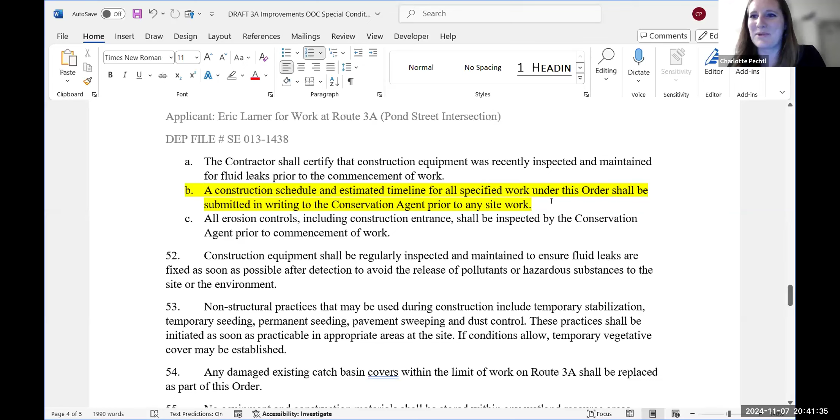These highlighted conditions, I really don't think are needed. I just had a question for the MassDOT side. I don't think you have to deal with any easements since you're working within the MassDOT right of way, so I'm pretty sure I can take this one out. And then I don't think we really need a construction schedule for this project, it's a very small limit of work, so if the commission agrees, I can take this out. But like I said, this was put in place for the larger projects on 3A.

So pretty much just before construction, certifying all equipment was inspected, maintained, no fluid leaks, and then the erosion barriers inspected by me prior to work. That's really standard for all of our projects. Construction equipment regularly inspected to ensure no fluid leaks. A lot of this is a little bit repetitive, and then just using any temporary erosion control practices as needed. This was within the other MassDOT projects. I don't know if you guys agree with that or if that's within the project budget for this particular work.

I know you guys weren't doing any improvements to the stormwater, but I don't know if it's worth keeping a note on if any catch basin covers get damaged, would we want to see those replaced? We do include quantities where we're resurfacing certain areas, particularly crosswalks here. We include items to R&R the structure, just in case it needs to be adjusted even slightly, and as part of that we usually have a small quantity of replacement covers in case, like you're saying, they are damaged. So I think that would be fine to leave in because we do consider that as part of our project.

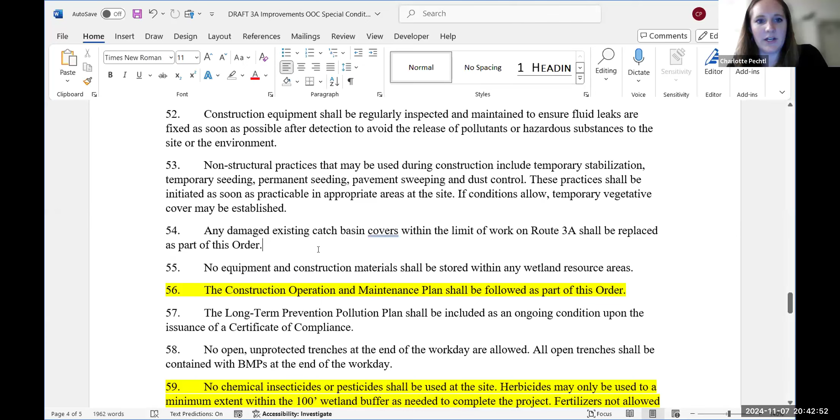Okay great, and then again a lot of this is very repetitive, but common sense about not storing anything close to a wetland. I don't know necessarily if we need a construction O&M here, just because I think it's pretty basic, unless you guys want one, but they do have a long-term prevention and pollution plan that was included in the NOI and the stormwater report and checklist. So I don't know if the commission feels strongly about wanting to see an O&M plan and having that be followed as part of the order for this particular project. Do you think you need one? I mean, you're going to be the one doing the inspections and stuff, so in a way this set of conditions kind of is one. Yeah, okay, I guess I can take it out.

They did provide... I don't think you guys had an O&M plan for construction, but you did have a long-term prevention and pollution plan in your stormwater materials, so that's kind of why I highlighted it. And then same thing with open trenches, we just want to make sure that open trenches are contained with BMPs at the end of the day. Like I said, I don't really know how much you guys have to be doing that.

And then I'll defer to the commission on this one. I don't think for this project they're going to be using these types of chemicals, but we had put this in for the other two MassDOT projects. So do you guys want this to stay or not stay?

No, let's keep that. Okay. I don't think we need this one unless you guys feel strongly that they have to, like I said, it's an intersection. It's not a whole section on 3A where they're going to be working in wetlands. So I'm okay taking it out if the commission's okay with that.

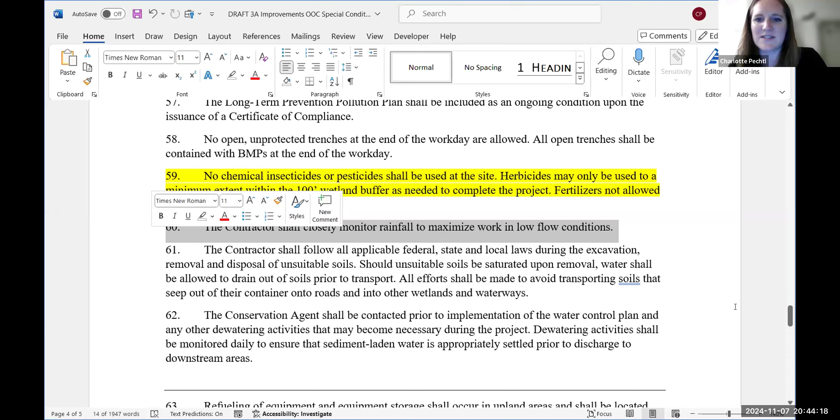Sure. Okay. And then following laws in terms of disposal, removal of unsuitable soils, pretty common sense here. And then I don't think we really have to dewater here. Do you guys anticipate any dewatering in this area? I really don't think so.

So I'm okay with taking this out if the commission's okay with that. Yeah, like I wanted to keep everything first, then take it out versus not having them. And then same thing with refueling, not being near a wetland outside the buffer zone to the maximum extent. We had talked with the other MassDOT projects that may or may not be feasible. So just as far away as possible. And then spill containment, long-term pollution prevention plan.

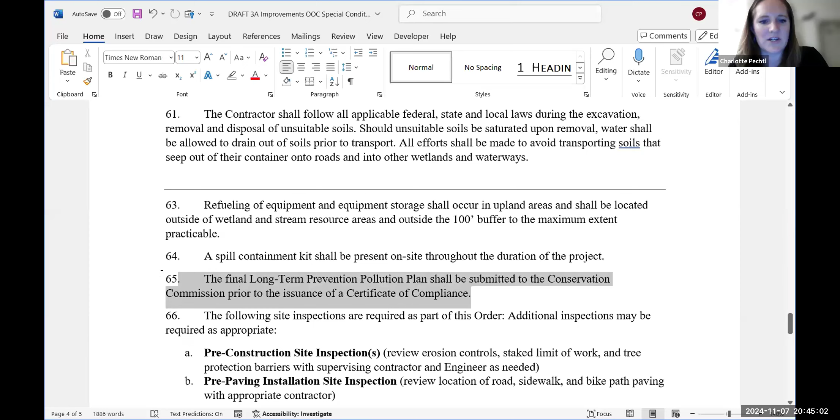Oh sorry, I think we already have that, so I don't think we need that. They already gave it to us. And then the site inspections for pre-construction, pre-paving and final, and then any additional inspections may be needed throughout the project if things come up. So like I said, all these conditions were taken from the other two MassDOT projects we'd already previously reviewed and approved. So pretty much just thinned out the set of conditions that we already had.

Doesn't sound like you guys had any issues with those either. No, no, okay, that's fine, Charlotte. All right.

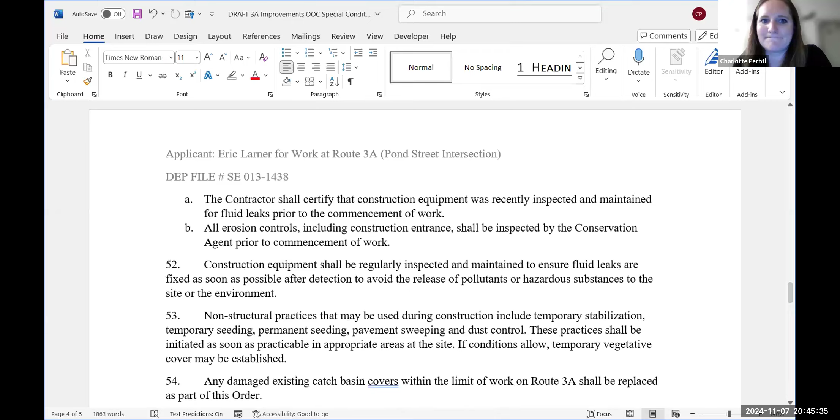All right, so I move that we issue an order of conditions for NOI 2431 at Pond Street and 3A for the work of constructing ADA compliant structures. Do I have a second? Berrigan, second. Okay, Kathy Berrigan, aye.

Steve Magnell, aye. Valerio Romano. Valerio still with us? Valerio, you're muted. Valerio, if you can hear us, you're muted. You want to have him abstain, Mr. Chair? Yeah. Tom Bell, aye. So this motion passes 3-0-1.

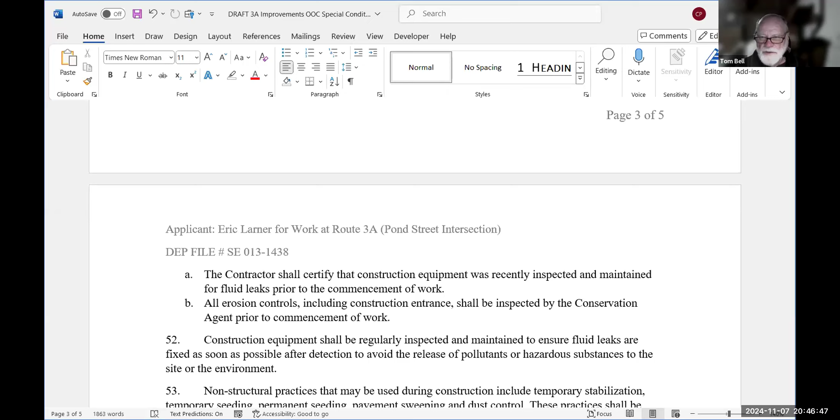And do we need to issue a variance? I guess not, right? I mean, no bylaw stuff. Yeah, so we're good. All right, the public hearing for NOI 2431, intersection of Pond Street and 3A, is now closed.

Thank you. Thank you, guys. Thank you very much. Have a good night. You too. Good night. Night. Okay.

So here we are, we're going to resume the public meeting for NOI 24-29 and stormwater permit 2427 at 82 Border Street.

Charlotte? Yes, one sec, two applicants. We have a big team here, so. Just waiting on Deb, Adam. There she is, thank you. I also see Eamon O'Mara as well, but he hasn't joined yet. Oh, there he is, he's also coming. Sorry, now that's everyone.

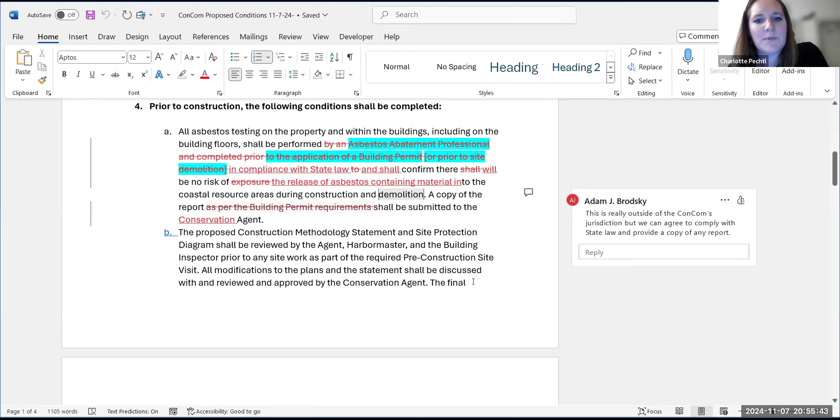Proposed construction methodology statement and site protection plan shall be reviewed by the agent, harbor master, and building inspector prior to any site work as part of the required pre-construction visit. All modifications to the plans and statement shall be discussed, reviewed, and approved by the agent. The final construction methodology and site protection diagram shall be submitted in writing for the permit records and shall be followed as part of the order.

This is pretty much what we did with 46 Border Street. I just pretty much drafted it as a condition because obviously we found out during construction that things needed to be modified, so we may need to do the same for this site.

In viewing the site from the water and the ground with the harbor master, she does feel like there can be a silt containment boom that goes on both sides of the site, just not in the middle of where all the rapids are. So we can definitely work with her and the building inspector to install those in the right location that we all agree on, given the harbor master's concerns with work and my concerns as well during the height of winter season.

We had drafted this proposed emergency storm contingency plan to secure, clean up, and restore the site before and after storm events, which shall be submitted to the agent, building inspector, harbor master, and any other appropriate local authorities. This plan shall be reviewed and approved by the agent, building inspector, and harbor master at the least, and shall include at minimum 3 permanent locations for life preservation devices, aka rings, to always remain on site.

That was specifically from the harbor master. I understand that may not be within our purview, but she was very adamant about putting that in. So if there's no objections from the applicant and their team, I don't see why this can't just go in because it's going to be a part of the plan anyway.

And then in the event there's a release of an oil or hazardous spill discovered, which must be reported to the Mass DEP under the Massachusetts Contingency Plan 310 CMR 40, et cetera, the applicant shall also provide written notice to the conservation agent. So just making sure that we're included in that plan if there is any hazardous or oil spill event.

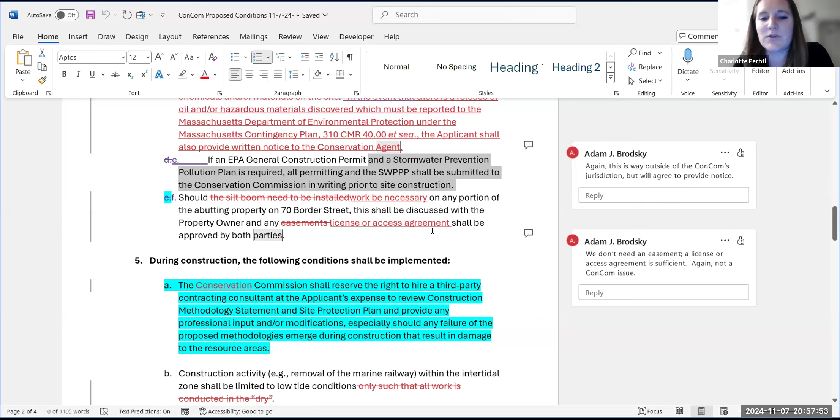And then this is addressing a concern from an abutter, just that should there be work necessary in any portion of the abutting property at 70 Border Street, this shall be discussed with the property owner, and any license or access agreement shall be approved by both parties, since they're working close to the limit of both of those properties. During construction, the following conditions shall be implemented.

The Conservation Commission shall reserve the right to hire a third-party contractor consultant at the applicant's expense to review construction methodology and the site protection plan and provide any professional input or modifications, especially should failure of the proposed methodologies emerge during construction that result in damage to the resource areas. We put this condition in just considering the fact that this is a very sensitive area that is much more exposed to the northeast winds and the rapids from the Gulf during those tidal exchange events.

And then construction activity, removal of the marine railway within the intertidal zone shall be limited to low tide conditions. That was a condition recommendation from Division of Marine Fisheries. Actually, the next couple are from DMF.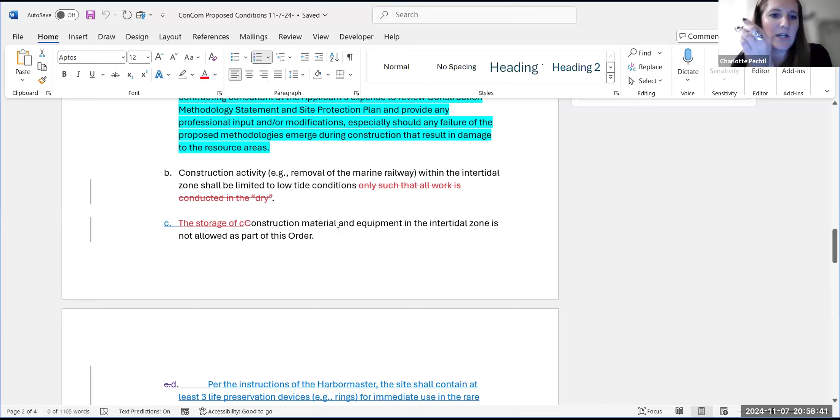The storage of construction material and equipment in the intertidal zone is not allowed as part of this order. And then again, this might be a little repetitive, so I could take it out, but per the instruction of the harbor master, the site shall contain at least 3 life preservation devices, rings, for immediate use in the rare instance of safety risk events. All work shall be conducted from the upland portions of the site. No work shall be allowed within land underwater except as provided in the construction methodology statement and site protection diagram for removal of the railway and for installation, modification, and removal of the erosion sedimentation controls.

Proposed silt containment booms shall not be installed in a manner that restricts fish passage to the Gulf River. Site dewatering is not allowed as part of this order without approval from local, state, and federal permitting authorities. Prior to retaining wall construction, the plans and revised site plan as applicable shall be submitted to the agent to determine if amended permitting is required.

Any fill brought onto the site shall be clean, and if any soil testing is required to comply with state law, a copy shall be provided to the agent.

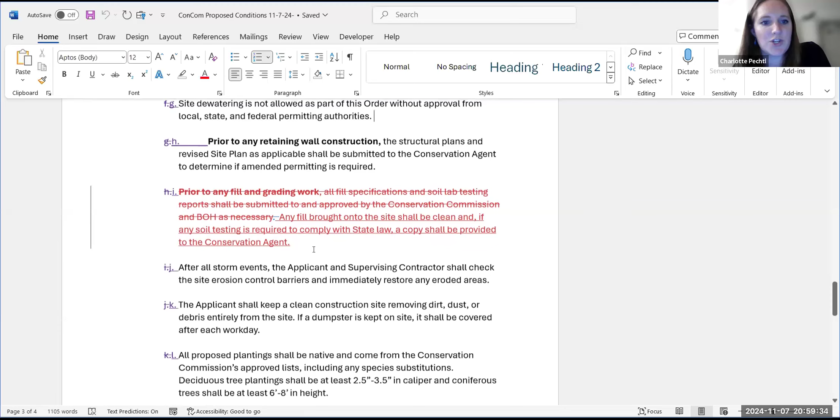After storm events, the applicant and contractor shall check the site erosion control barriers and immediately restore any eroded areas. That's also part of our template, that if there's any damage to the resource area, it has to be immediately repaired. This is just reiterating that a bit more.

The applicant shall keep a clean construction site, removing dirt, dust, or debris entirely from the site. If a dumpster is kept on site, which I'm sure it will be, it shall be covered after each workday.

All proposed plantings shall be native, coming from Concom's approved planting lists, including any species substitutions. Deciduous tree plantings shall be at least 2.5 to 3.5 inches in caliper, and coniferous shall be at least 6 to 8 feet in height. I think the proposed landscaping plan has mostly deciduous, but if they were to switch, I just wanted to put that language in there.

For site inspections, with everyone's permission I will not read these word for word, but it's pretty standard: pre-construction inspection, before the railway is removed, before the retaining wall is installed, before the stormwater controls are put in, before final grading, then landscaping, final inspection, and any additional inspections as needed. Sorry, that was a lot.

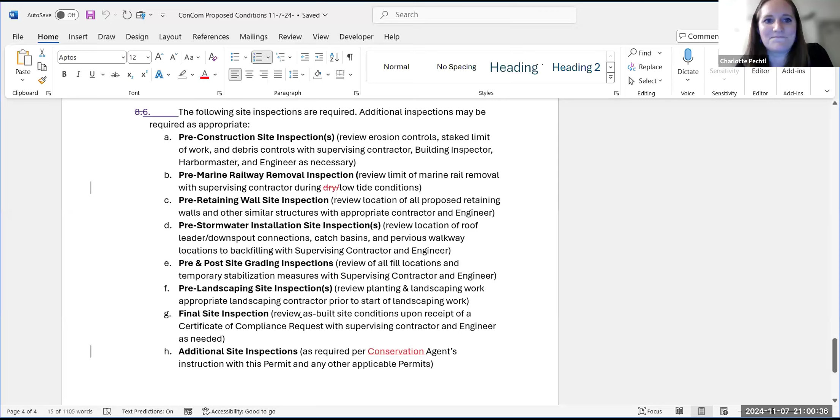Thank you. You were going to comment about an issue that I believe Chris McIntyre brought up.

Yes, I'm sorry I got his comments late, but the additional form he was referencing - I don't know if the applicant's team can weigh in on this - was the AQ06 construction demolition notification form from Mass DEP, which is required for demo construction projects and necessitates an asbestos survey. It should be noted that the commission is concerned about the prior use of the site for boat building, which may have included asbestos, and asks that testing be conducted on suspect asbestos containing debris should any be uncovered.

So Chair Bell, it's Adam Brodsky. I think we have that covered in condition 4A. We have to comply with state law. I can't tell you whether that's the appropriate form for this application.

So my suggestion is - as I explained, Massachusetts has a very rigorous program to regulate asbestos containing materials. I think I kept referring to asbestos containing building materials last time we spoke, but it's asbestos containing materials, so it's a broader category. We have to comply with the law, and so I respectfully suggest I don't think we need to be more specific. That avoids, I think, having a discussion regarding the limits of the Conservation Commission's jurisdiction with respect to asbestos.

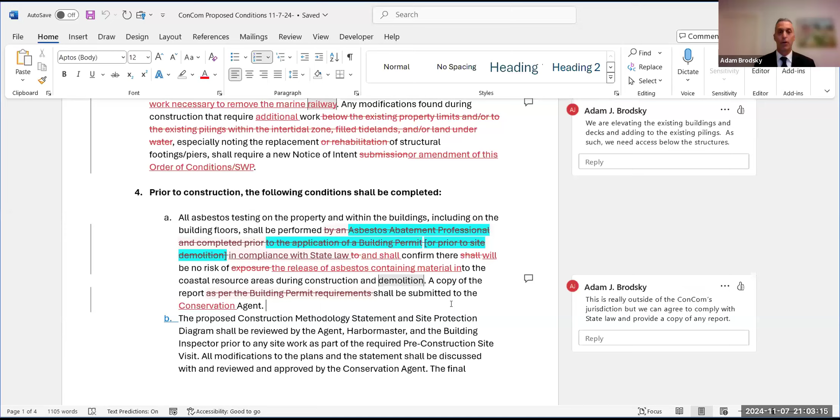Yes, and to also provide you any notification with respect to a release of OHM under Chapter 21E. Yes, we're grateful for the commission working with us cooperatively. We'll continue to keep you informed. Yeah, I think this is sufficient then.

Did the commissioners have any other comments or concerns about this?

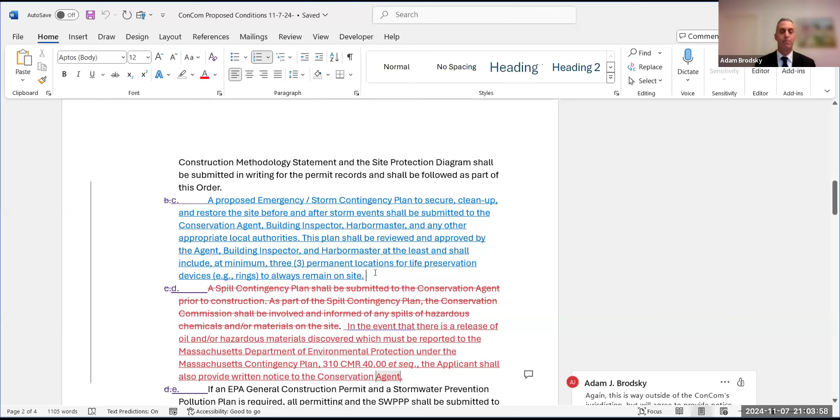We pretty much asked for, with the exception of the life preserving stuff, this for the Government Island Wharf project, should that move forward. That's agreeable. I might suggest deleting the second reference to the preservation devices to eliminate redundancy, but that's fair. We have every interest in making sure this site is secure and safe during any storm event.

That was definitely a shared concern from myself and the harbor master, just in the rare instance those events do occur, what the site's going to look like before and afterwards and how you're going to contain it. So I think the storm contingency plan, unless the commission disagrees, seems like a good negotiated condition where we're not restricting the work, but we're still asking for a plan of how the site's going to be kept safe and how the resources will be safe. Back to the commission.

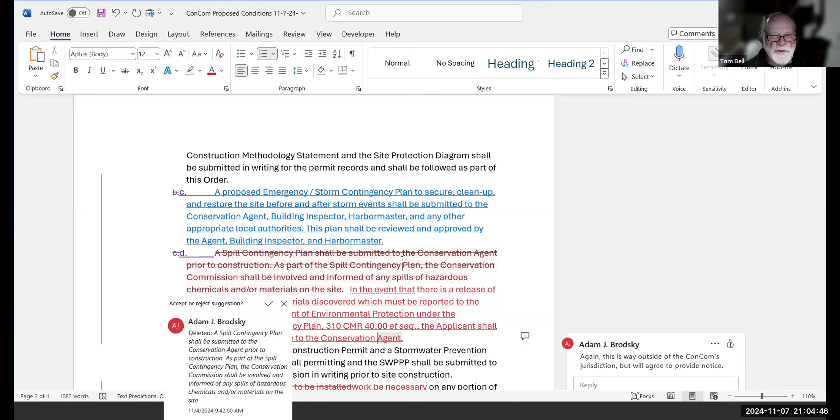Any last comments or questions? No question.

Has Valerio rejoined us? Did he leave the call? I have, no, I have. I'm sorry, oh, I have. Good, I was like, no, we're good. We cannot have a meeting right now if you're having an issue. Nope, I have it, sorry. Perfect, thank you.

Great, okay, so if nobody has any further comments, then I will move that we issue an order of conditions for... sorry, I have to look, too much stuff on my screens here.

I move that we issue an order of conditions for NOI 2429 and stormwater permit 2427 for 82 Border Street, with the conditions that have been discussed tonight, on the screen and entered into the meeting minutes.

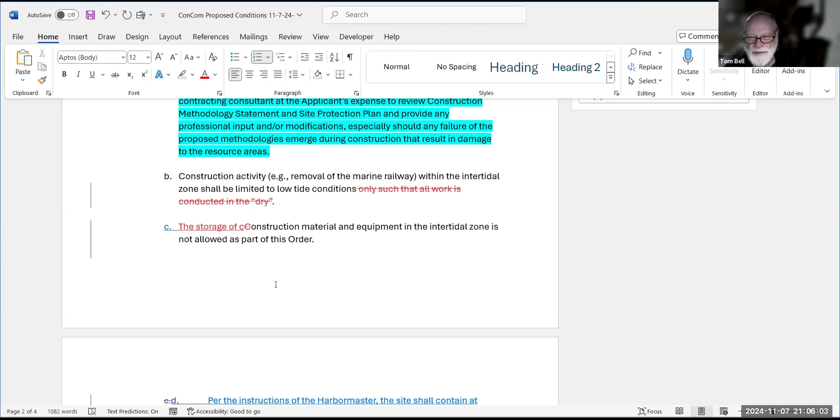Do I have a second? Berrigan, second. Thank you, Kathy. Kathy Berrigan, aye. Steve Magnell, aye. Valerio Romano, aye. Tom Bell, aye.

This vote passes 4-0-0. Public hearing for NOI 2431. Chair, we need a variance for the work in the... we need a variance for the greater than 1,000 square foot alteration of the resource area, which in this case would be riverfront and land subject to coastal storm flowage.

So I move to issue a variance for work within the riverfront, within the land subject to coastal storm flowage, and to the buffers to the wetland resource. Did I miss one? Yeah, it'd be the 50-foot buffer to the intertidal zone, the salt marshes, and then a greater than 1,000 square foot alteration of a resource area, which would be land subject to coastal storm flowage and riverfront area. Okay, so moved.

Do I have a second? Berigan, second. Kathy Berigan, aye. Steve Magnell, aye. Valerio Romano, aye. Tom Bell, aye. Motion passes 4-0-0.

So the public hearing for NOI 24-29, stormwater permit 24-27, 82 Border Street, is closed.

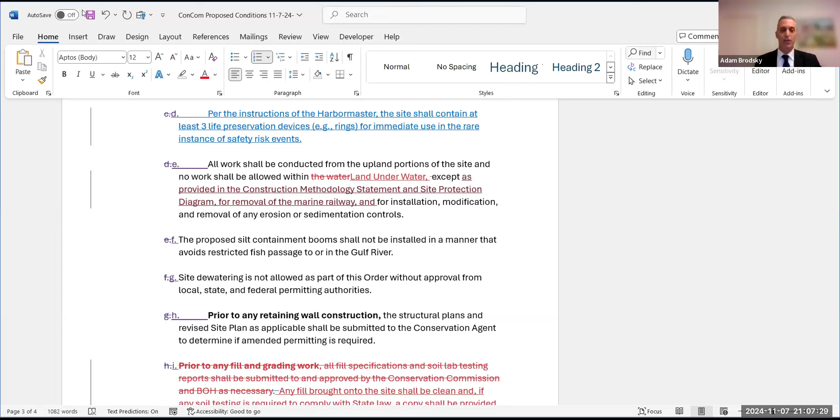Thank you very much. Good night. You're welcome. Thank you very much. Thanks, guys. Thank you. You're welcome. Thank you. Okay, you're all welcome. Thanks. Yeah, thanks, guys. Appreciate your time.

So next up is a show cause hearing for 46 Little Harbor Road. One second. Actually, as of this afternoon, I spoke to the applicant.

They did provide some planting suggestions, but I talked with them that some of the species they chose may not do well in those exposed coastal areas, so they just needed a little bit more time. They've asked for a continuance to November 21st. I'm fine with that because they're actively working on it. It would be different if we didn't hear from them with an update. So they continued to 11/21 and just said they need more time to work on it. Okay, that means more free time for us.

Yes, you just disposed of that one. Okay, so now we move on to the fun part of the evening, certificates of compliance. I'm just going to turn this over to you, Charlotte.

All right, so I'm just going to go down the list, and we do have some people in the audience for this as well. I'm going to start with 450 King Street. Sorry, I'm just promoting Colin, who's representing Colin McSweeney. And Colin, can you please just state your name and affiliation for the record?

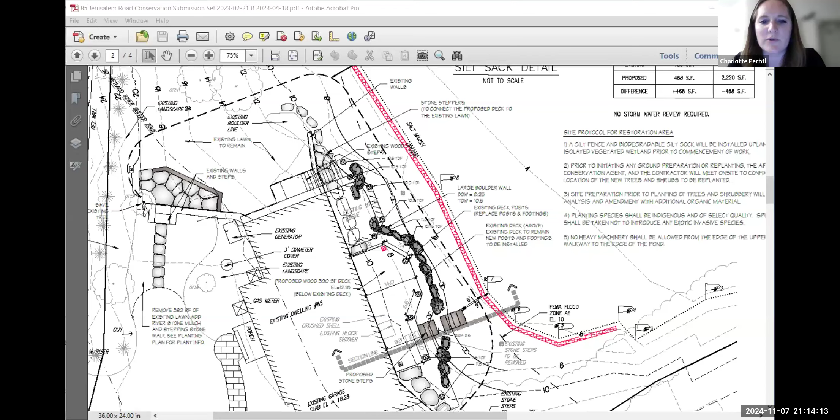And the as-built, I think, is really helpful to show, which I can show in a moment. Just wanted to give you guys a quick look at the approved plan. Most of the work was in the 50-foot buffer, given the site's existing conditions close to the marsh. Let me just pull up the as-built.

There we go. So Yvonne was kind enough to note some of the changes since the approved plan. Starting with the first one, the proposed patio in the 100-foot buffer, they ended up not constructing that one, and they don't want to install it anymore. But Yvonne is aware that if she would ever change her mind in the future, she'd just have to come back to us.

During construction, we did note that there was just a gap in the boulder wall where a few additional boulders were added to further stabilize the slope. That was a previous administrative change that I'd looked at with our chair, and that was administratively approved. There was also a Norway maple that was discovered to be a hazard to the power line, so this was another administrative change.

We had requested a tree replacement in the 100-foot buffer, so she installed a new Eastern red cedar. I can pull up pictures of that, but it was put in a pretty similar place as you guys can see on the as-built. There was also an additional footing to the lower deck that had to get added during construction, which didn't really change the limit of work. It was just an additional footing underneath the existing deck in disturbed space.

The plantings were just a different selection than what was on the original plan. I don't know if you guys saw my report, but it was pretty much just a different selection of perennials and shrubs. There were no trees planted as part of this project because no trees were removed other than the Norway maple, which was replaced with the Eastern red cedar. It was just a different variety of drop seed and sedge species, and different shrub species.

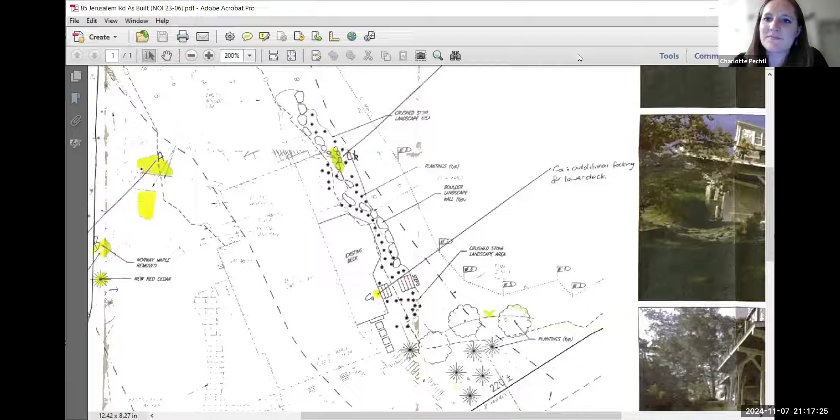Awesome. Thank you. Great. Thanks, Yvonne. I'll get that to you probably early next week. Thanks. All right.

Next one. So just a quick update, the COC request for NOI 2103, 2104 and stormwater permit 2102, 2103, as well as NOI 2407. Lots of numbers. That one has been continued to 11/21. We're just waiting on an updated as-built with some additional information, so I'll present that next time.

So good. One more. Yeah, that was quick. All right, the next one, 2235 for 99 Border Street. I think I see Jeff in there, so I can promote him. And I don't see the applicant, so I think it's just Jeff. All right, so for 99 Border, this was a dock, pier, and gangway project.

I can pull up the as-built. Actually, I'm going to pull up the approved plan first, just so that you guys can see A and B. So this was a property that already had an existing pier that needed to be brought into compliance with an active Chapter 91 license. And then they ended up getting a second license for the proposed landing, gangway, and float. So the float and the gangway are the same size that were proposed in the approved plan. I'm just going to pull up the as-built.

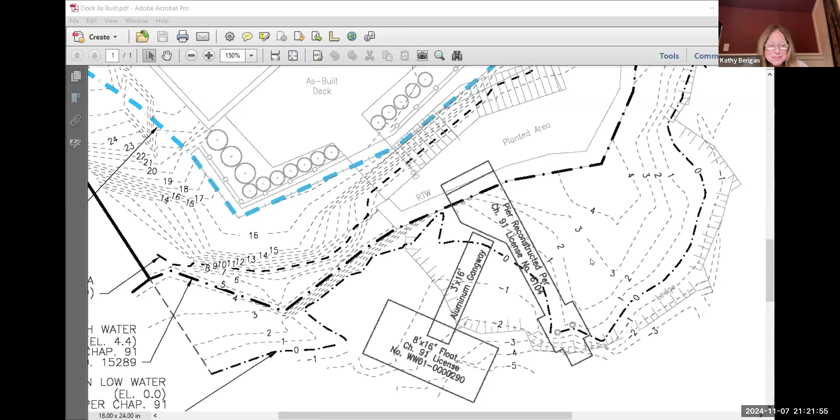Now it's time to vote. Kathy Berigan, aye. Steve Magnell, Steve Magnell, aye. Valerio Romano, Valerio Romano, aye. Tom Bell, aye. That motion passes 4-0-0.

All right, 3 more to go. Yes, thank you. And Jeff, were you on for this one too? Yeah, septic as-built, 7 Marion Way. Okay, yes I am. Yeah, so this was another septic project.

I think it's pretty standard for people to forget about closing the order conditions at this point, because there was a certificate of compliance issued by the Board of Health in 2021. Hold on, it might take me a little minute to pull up the plans, but for the most part I didn't notice any deviations. It was installed in the 100 and the 50 as per the plans. And I did look at the Board of Health COC that was issued 3 years ago.

So I had originally, for context, written the applicants a letter that their permit had expired. And so they responded with actually closing the permit out, which is obviously an acceptable option. So this is the as-built from the septic plan from 2021. It's pretty much done in the same year the permit was issued.

So just for reference, Marion Way is off of CJC. The tank and the pump chambers and stuff were all installed in the 50-foot buffer behind the home. The only deviation that I will note is that this was further - it's closer to the wetland than the original plan. I think the original plan had it a little bit closer to the home, so closer to that 10-foot setback, but it is within existing lawn space.

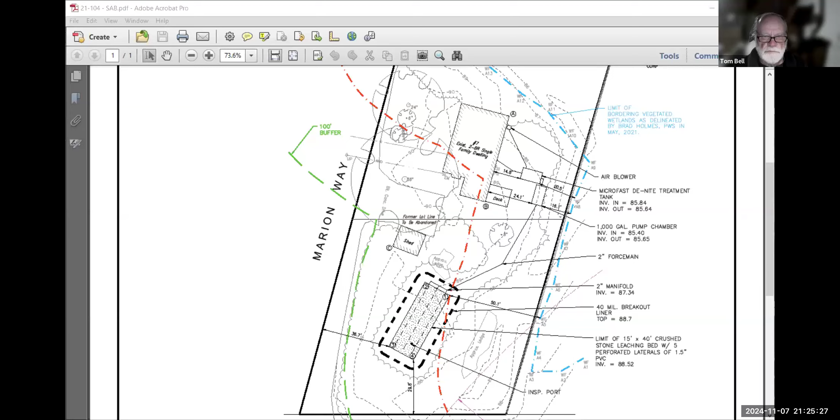I move to issue a certificate of compliance for NOI 2119, 7 Marion Way, with condition 40. Do I have a second? Berigan, second. Kathy Berigan, aye. Steve Magnell, aye. Valerio Romano, aye. Tom Bell, aye. That motion passes 4-0-0.

Okay, two more to go. Thanks again, Jeff. Thanks, everyone.

So these two highlighted on the agenda are related to our favorite housing sales. They're a little odd, but I'll be quick. I don't know if you had a chance to review the letters submitted by Sherman Law in Hingham. Basically the registry is being complicated and they want new certificates of compliance. Both certificates of compliance were already issued for these permits at these addresses. With the first one, 34 Hemlock Way, the land court is complicated to deal with and they want a separate partial COC specifically for 34 Hemlock Way, described as lot 12 on the land court plan. They would not accept the full certificate of compliance for the whole entire work because this was a development. So they wanted a partial COC specifically for that lot confirming the work was done. There's really nothing else to add, other than the registry just wanted it.

And so it was, was it done? Yeah, oh it's done. If you see in OneDrive, we had to deal with this land development, this huge development last year. I had done a summary report of all the orders and conditions I could find. I found COCs that were pretty much issued here and there, obviously all issued inconsistently. There's some complete COCs, some partial COCs specifically for certain lots. There's just no partial COC for this particular lot. So that's why they're looking for a partial COC just for lot 12, so that land court can successfully record it and enter all of their required data points.